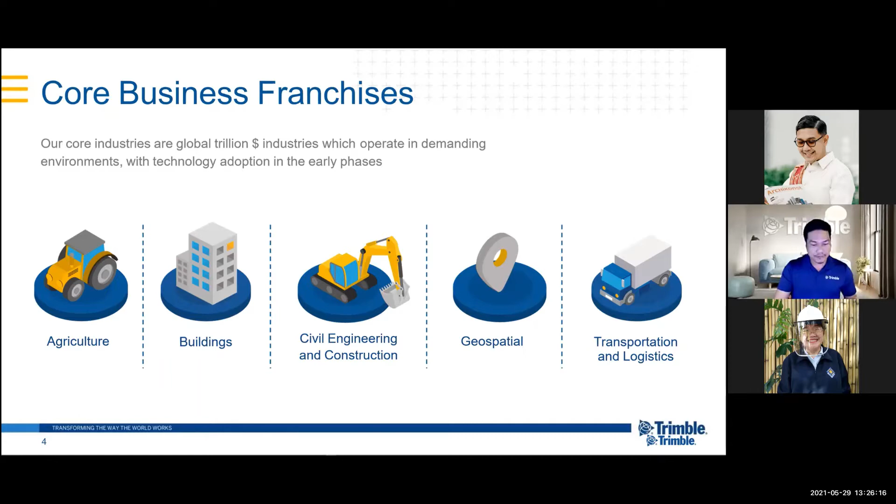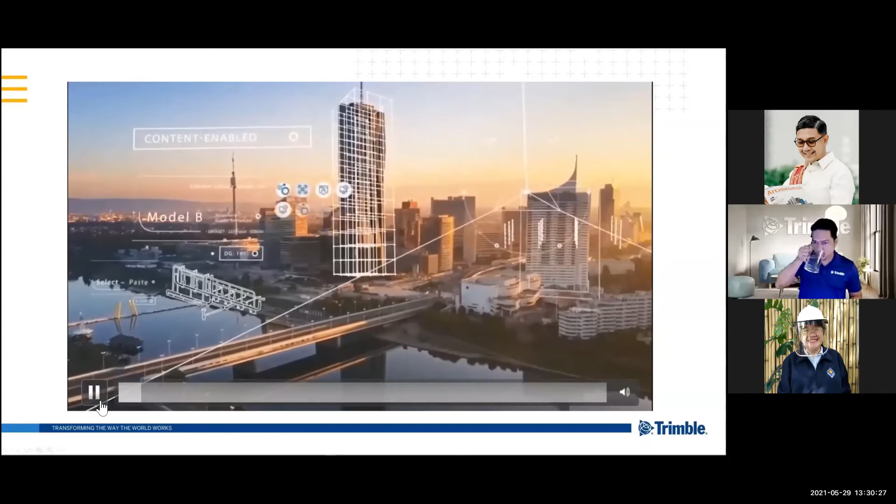Every person and team can work together for shared success. So when you look at your final creation, you can sit back and say, I built that. Whatever you can imagine, Trimble Constructible can build. Trimble.

Connected workflow, to bridge the information islands for better collaboration between project stakeholders. Content-enabled, to enable project teams to eliminate guesswork and misinterpretations. Constructible model with high levels of detail, to provide a means to identify project issues more accurately and make informed decisions.

Apology for the pausing, I think it's because of the internet.

In Singapore, Integrated Digital Delivery (IDD) is identified as one of the 3 key components to transform the construction sector. It aims to streamline work processes through the use of digital data across the entire project lifecycle. The constructible process and IDD complement each other.

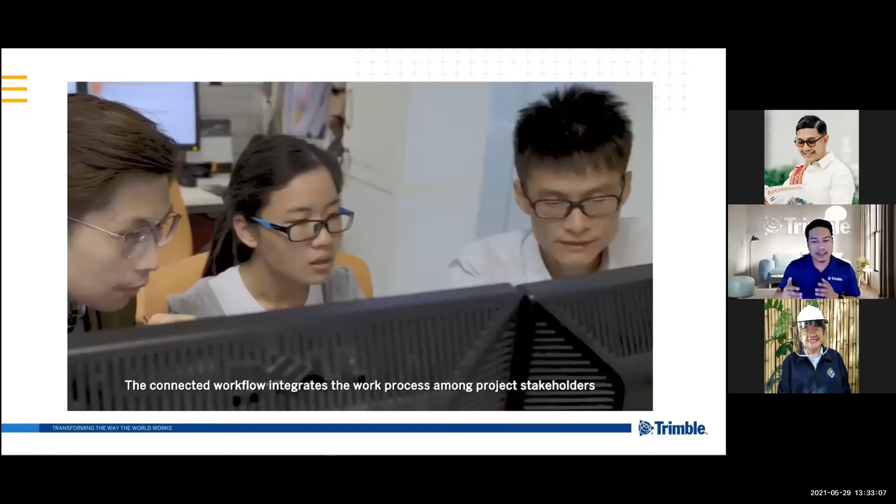If I remember correctly, 2015 it was BIM, and after 2017 it became VDC, with Singapore as one of the BIM practitioners in Southeast Asia. So they developed a lot of workflow to improve these stages.

Utilizing digital content of a constructible model for quality delivery. At the design stage, Tekla enables digital design with integrated physical and analytical models.

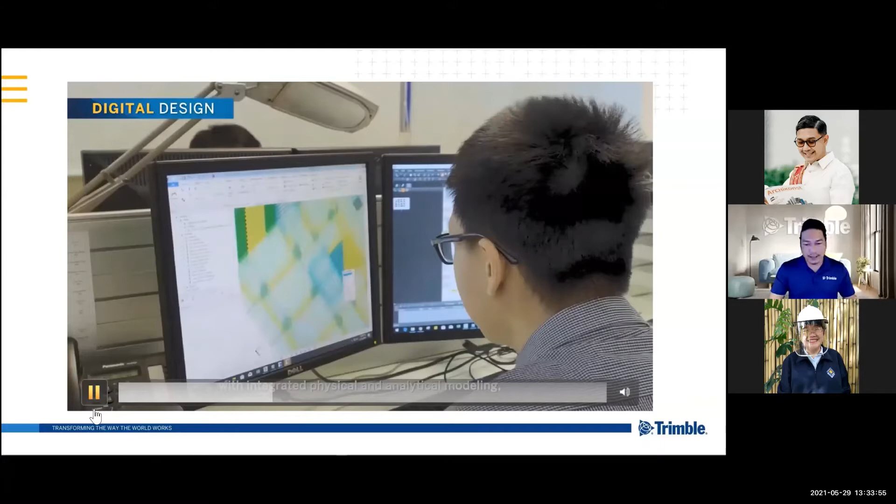I think playing the video would take longer bandwidth to play, so maybe I'll pause it now. If you want to watch it later on, I can give you the link to this 4-minute video.

That video concludes the entire constructible process, all about this. As you could hear in the video, Trimble Constructible is a system of interacting software, hardware, and services. It's not just about software - also hardware, like Trimble navigation, laser scanning, and this, plus some of the cloud services that we offer. These complete the entire process.

As you can see here, it could estimate, improve, and build confidence. You do the estimation, and since you have a better quality model, you have the data accuracy that you can bring with it. So it started with constructible, then it goes to content enabled, and then connected.

So all three disciplines, we call it the 3Cs, complement IDD, the so-called integrated digital delivery.

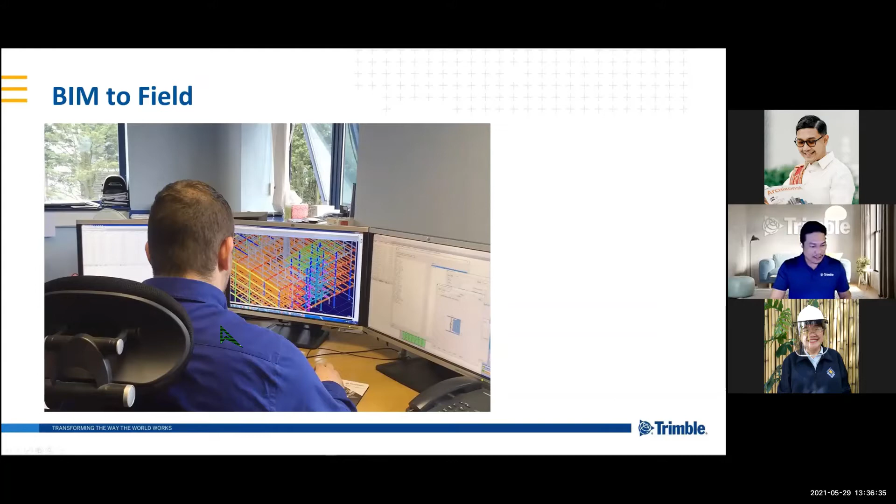If you see here on the screen, this blue person at the office is creating a model, and then they pass it to the site in order to bring much more accurate information. This is one of our Trimble navigation equipment.

Hold on. Are you still able to see my screen? The screen has stopped and the external display is disconnected. Let me stop again and share. Sorry about that. Are you still able to see my slide presentation?

Hold on, notes, how to stop sharing. Sorry, give me a second. I see, okay, this one, right? Is it correct now? Okay, thank you, sorry, my apology. I'm not familiar with Zoom because we use a different platform, GoToMeeting and some Microsoft Teams, but Zoom especially in our corporate, we don't use them.

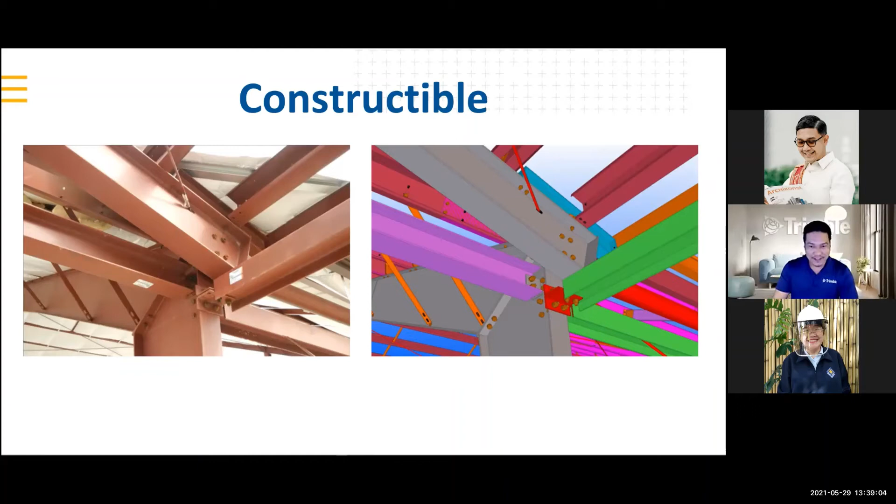If I move forward, this one is another example taken from the Sports Hub project. As you can see on this screen, it was modeled side by side, exactly showing how the shape is and how it was fabricated.

We call it a universal joint fork - this is one of the movable panels in Sports Hub. And then the other one is the entire assembly, but not the entire piece, only a delivery piece for you to be lifted in one shot. They're exactly the same as what was in the model.

Okay, so what is in the model can be fabricated. This was taken somewhere in 2014, and then this is our actual model. I manage a group of very highly skilled modelers at that time, majority of them are Filipinos. So like what Sir Lex mentioned, Filipinos are capable of doing a lot of things, especially when it comes to handling technologies.

So this thing is the site stage, and then I put it side by side with the project, so they are exactly the same. Imagine if you have built your project in BIM and then you found out some issues, you can immediately avoid those kinds of issues before they happen. So you can predict them.

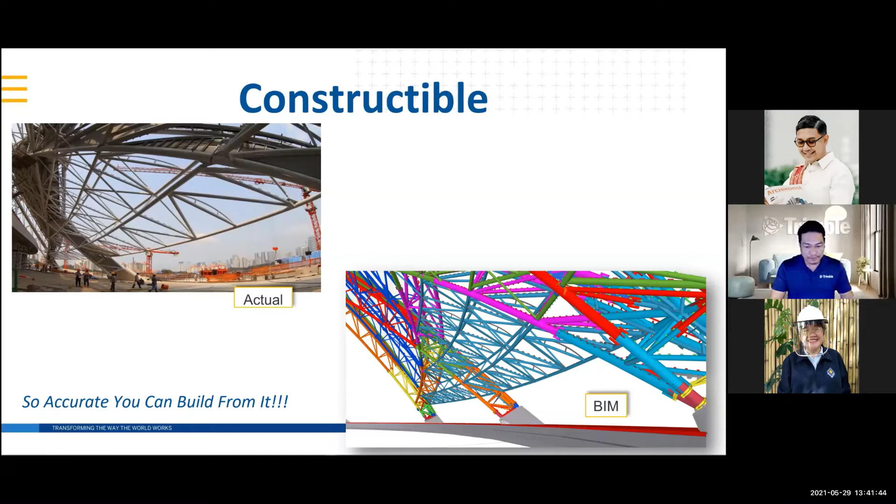So yeah, just to share with you, in short, this is the constructible model on a high level of detail.

Traditionally, on the left side, we are using a CAD provider. I'm not talking about 2D AutoCAD, but there's a lot of 3D software that's not all so-called BIM. I think it was clarified clearly by Sir Lex this morning, there's a lot of 3D software - AutoCAD has 3D functionality, but it's not considered BIM software.

Why does it become BIM? I think he also mentioned the word itself, which is information. So Building, Information, Modeling. If you have the building and the information attributed to that geometry, and then you have the modeling, then these are called BIM. You can go down to the last bolt, put it everywhere there - embeds, mechanical, all the rebar - and then consolidate all of them in one detail. Since all of them are in one entity, you can easily determine what needs to be avoided or considered during the BIM modeling.

So in Trimble - not all BIM software has a very high level of detail. I'm saying this because I'm from Trimble, but Tekla is the only one that could do a very high level of detail, even down to the last bolt, even to such tiny details. So we model that functionality.

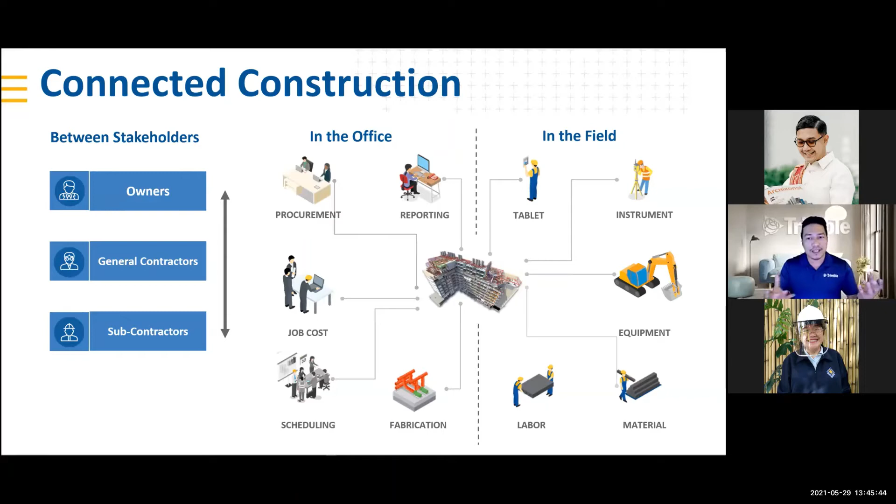So how we do this in Trimble is through Trimble Connect.

In Autodesk, this is similar to BIM 360. So Trimble Connect is where you can put all of your discipline work in different respective stages, and then communicate with the cloud. Later in my presentation, I'm going to show you some quick workflow for Trimble Connect. After we model, we create drawings, we create reports, and then we do this in Trimble Connect later on.

Okay, here's Trimble Connect. So Trimble Connect is an application for construction collaboration, from 1D to 5D project.

Imagine if you have a Google Drive, a file management system that can store data. At the same time, you can also collaborate and exchange information without moving to different software. Meaning, if you are a consultant, you don't need to purchase Tekla Structures in order to view their model. You can communicate with Trimble Connect and use what we call IFC, the Industry Foundation Class format, to view this model.

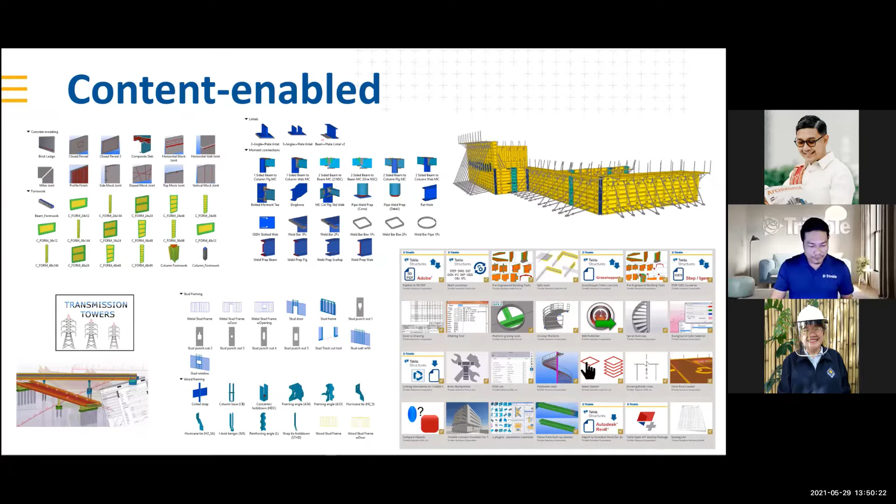Okay, so we also do open API.

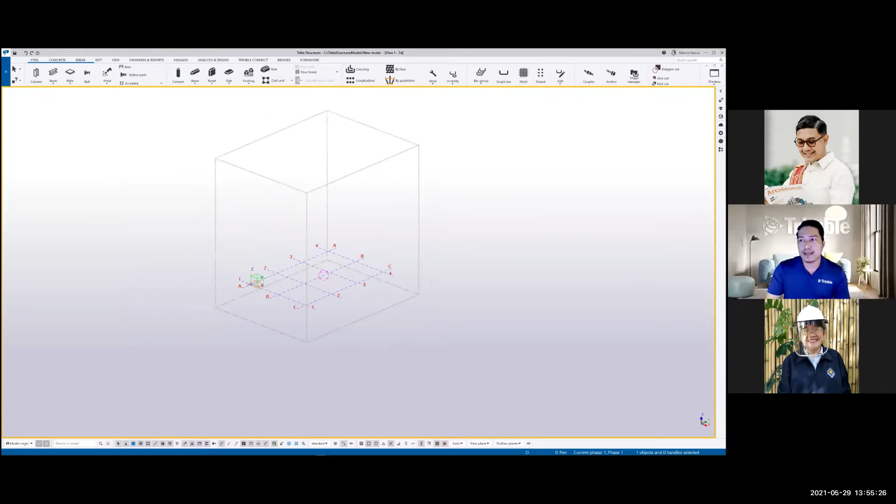Okay, so this is Tekla Structures 2021, which you need to install on your computer. So let's create a scenario wherein Sir Lex is from the engineering consultant. He uses a BIM model for them to create an analysis in order to determine the sizes and the height of the beam and the column.

And I am from the fabricator who will further develop the model into a constructible model. So I'm going to receive a file from him. This file could be an IFC, which is the common format file to communicate with different software. So I copied this link, browse, and I'm going to open it here.

Good thing about what Sir Lex mentioned previously, we have this so-called project base point. Project base point is where you can use your own model origin, but if you want to communicate with other entities, the architect might be using a project base point, meaning the project was located somewhere, maybe in Luneta. Since you are a fabricator you don't worry about that, but since you are communicating with the project, you will pass this model to them for coordination purposes, so both coordinates should be the same.

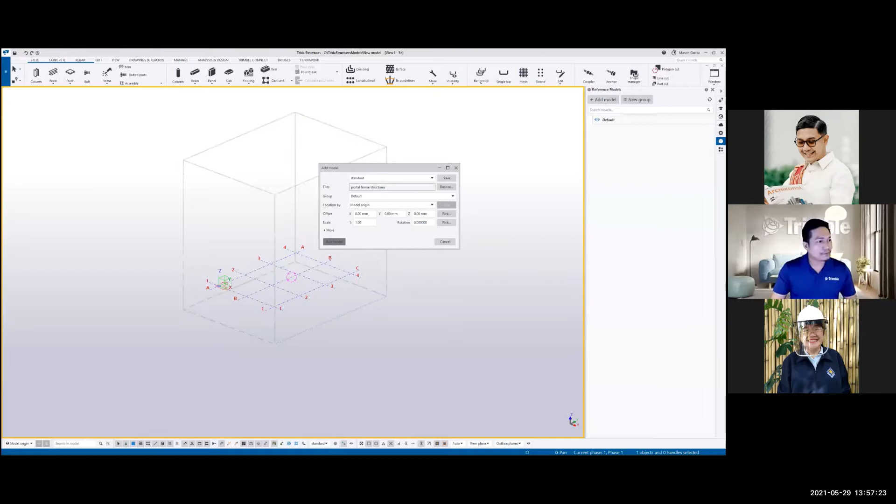Okay, so if you see this, can you see my model, my 3D model? Let me know if not.

Okay, so here, if I click this, this is one entity. By right, I cannot amend this model because this model was from a consultant. So in order for me to utilize this to be my Tekla model, I need to convert this into my Tekla native file. If I inquire this, it's basically an IFC format, which came from a different software. So instead of creating from scratch, you can utilize them and convert into native object.

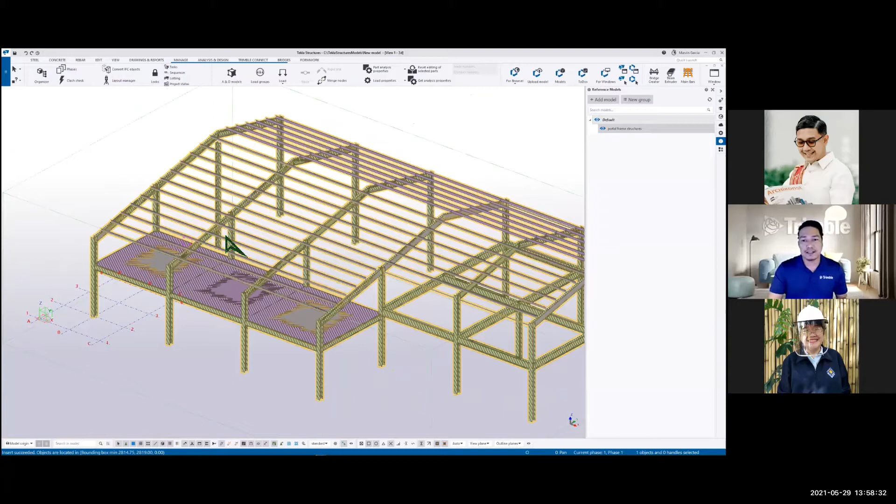Okay, so now it's done. Everything has been converted into my own model. So I'm going to hide this now, hide, right? And then apply.

Okay, so here, they look exactly right. A while ago, they are gray. If I turn on this, it is overlapping with the IFC model and the Tekla model. So there's two models here: one IFC came from a different software, and the Tekla model that's why I converted.

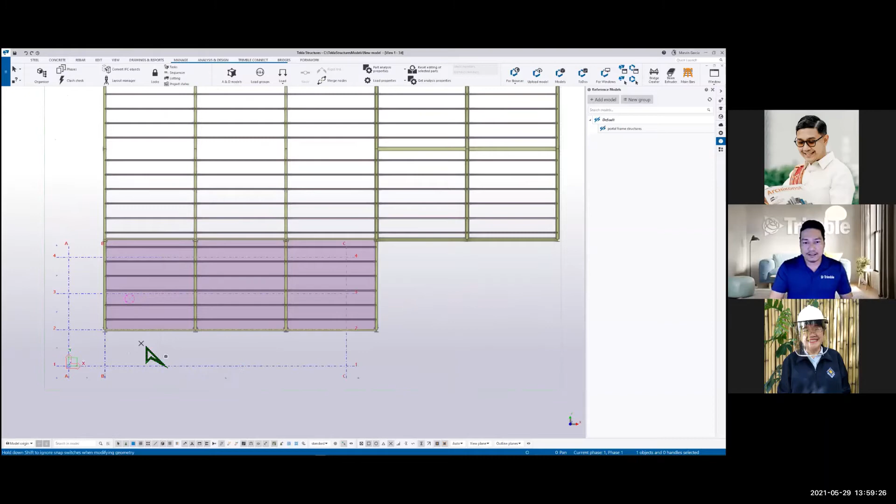Okay, so basically you have this model now. First thing to do is you need to select the grid line to be correct. So you can either drag this grid line in the position where you want to put it, or you can double click this grid line to modify the coordinate value, the x, the y, and the z. This is basic - even if you are using AutoCAD, you need the x and y for you to put all of your items.

So good thing I already saved them, so I don't have to manually input. So this yellow shows the new value that needs to update on this grid. So you see now it is matching with my model. Then I'm going to fit work area. Okay, so this is now the model that I am going to do.

But you can also create groupings. Let's say I want all my columns to be red. And I want all my beams, these supporting beams, but not including this slab, to be different colors. This color coding is normally done by whether they have the same name or same profile. Let's say for this one I'm going to make them maroon purple.

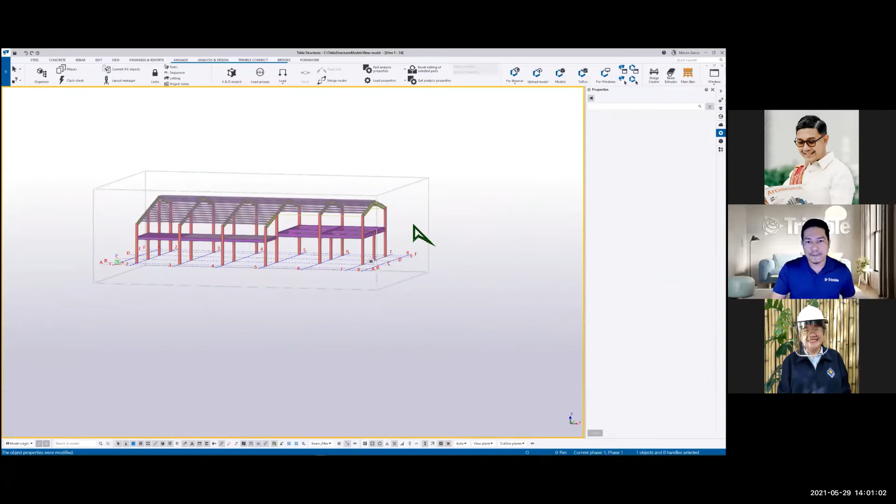Okay, and then all the beams here, I'm also able to select all the beams using filter, and from here, okay, all this beam but not this. Give me a sec. Then I'm going to change it to a dark green.

Okay, and then lastly, all my girts or purlins, let me put it, all my purlins, I'm going to change it to cyan. And then yeah, so these are just... and then I wanted to change all my slab to be gray. Okay, so just to make things tidy.

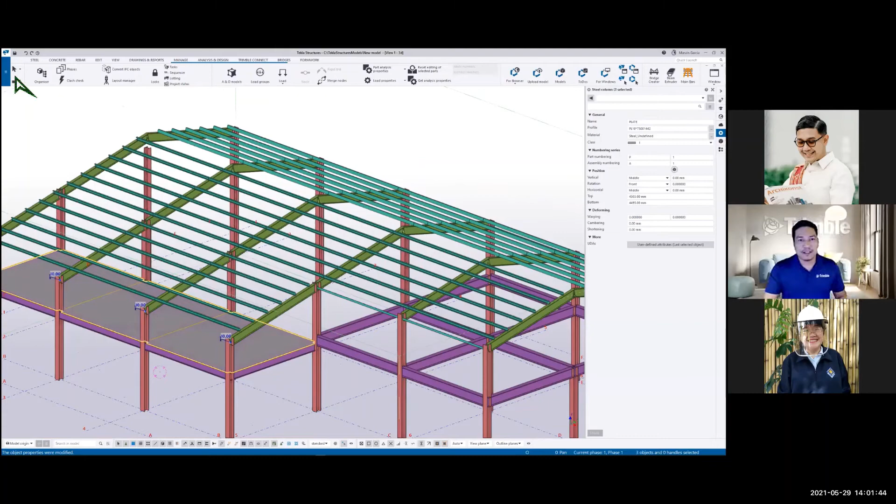Okay, then right, after this what I need to do - so I'm now starting to put all of my footings. So inside these Tekla structures you can do steel, you can also do concrete. So let's say of course we need pad footing in order to... okay, so you can put pad footing.

Okay, so you can either copy them or select them individually. So if you are an AutoCAD user, you don't have to worry because the functionality is almost the same as how it was being done.

Okay, so if you have the Tekla Campus, you may now be able to use them if you want. You can side by side install that and then do a simple demonstration. Okay, I don't have this. Okay, so I have this.

The good thing about the shape here, after I do a basic stick modeling out of this, let's create detailing connections. Let's create the connections out of this. So let's say this footing requires... okay, here, these are the library that we can use. You don't have to create them from scratch. So pad footing, and then you pick.

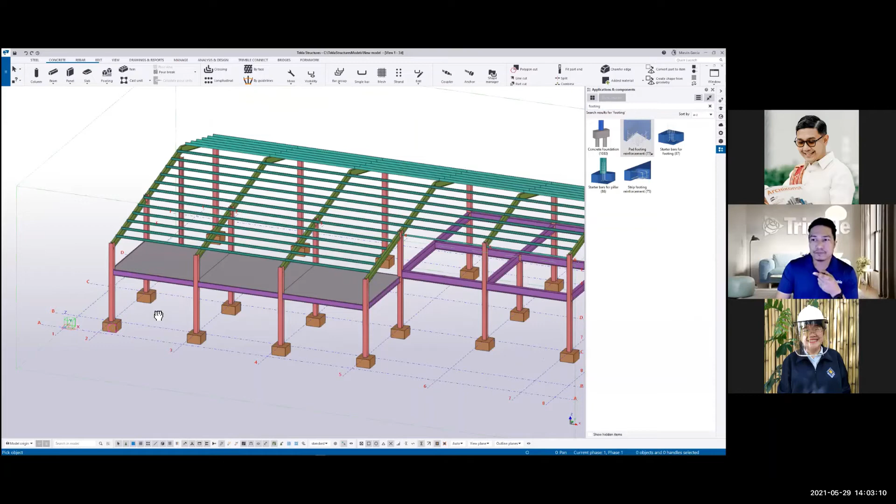So once you pick the concrete, it will automatically create the reinforcement based on that shape and based on the cover thickness. So if I double click them... since Tekla structures are more focused on, this is our strength, here you can specify the cover thickness - the top cover thickness, the bottom, what is the size, and the grade. You can specify the grade. By the way, we use here the BS 8666 or the BS 4449.

This morning I saw Sir Lex mentioning about the international standard.

Since we are in Southeast Asia, our standard here follows the Southeast Asia environment, wherein all the necessary grade, material profile, and codes are listed. If you are working with other countries like Japan, China, US, Australia, or Canada, where they have different codes, you should download that environment separately. So far I have UK and Southeast Asia.

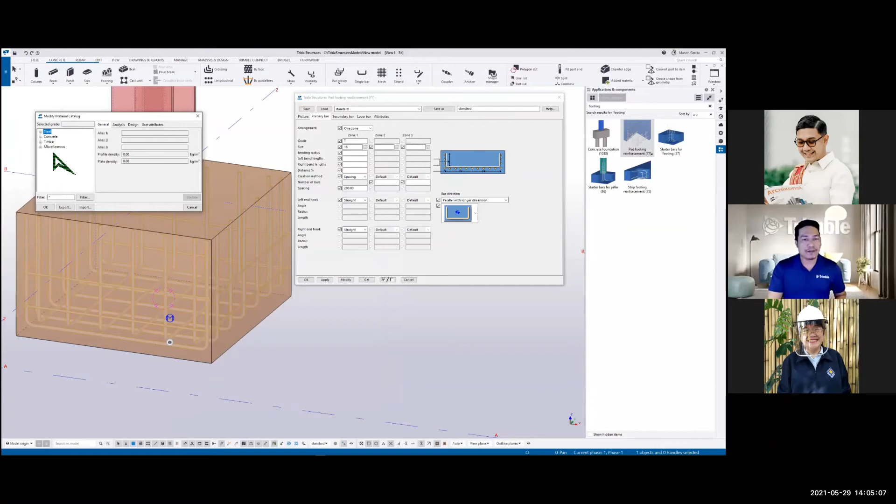So here you can change the angle, the bend, either 135 or 90 degrees. And then the secondary, you can also change the spacing. So everything can be modified here, to 135 or maybe 180 degrees.

Once you modify this item, if you drag it, it behaves intelligently. It follows the logic of the cover thickness, so you don't have to worry about what happens if there are design changes to a different number. The component logically extends following the cover thickness.

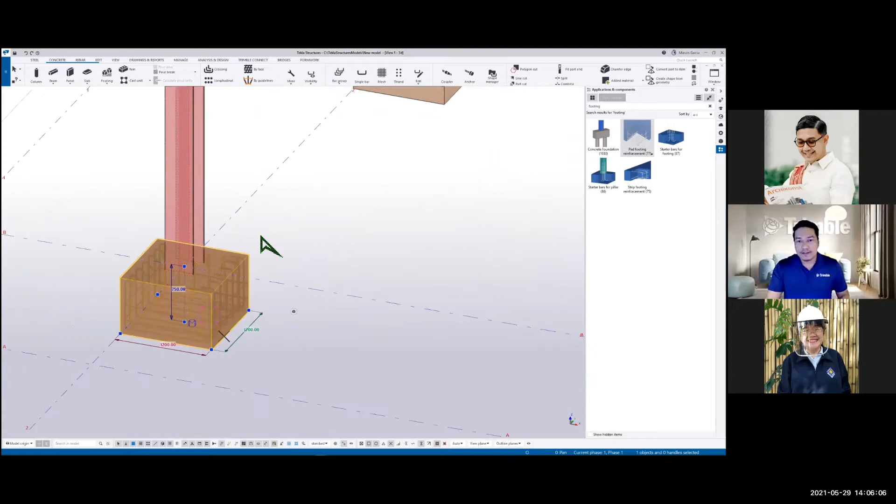So I can select this component. If I want to copy this functionality, I just double click and then apply. Apply means I want to apply all the bending following that same logic.

So let me delete this. I can highlight, and you see it follows. So if I highlight all of this, you see how much easier it is. You just need to highlight everything and it follows the logic.

So I'm done with the footing. You can also add a strip footing if you want, here. Let's say this strip footing, here. Let me pick one.

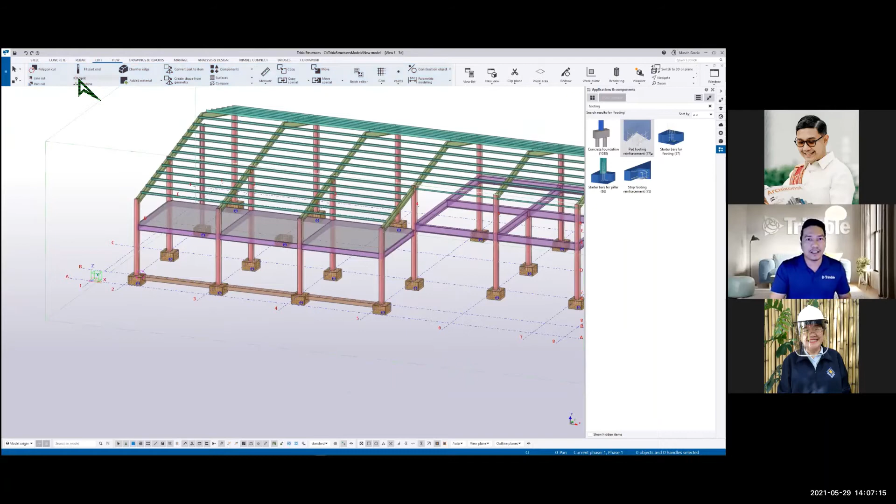Say this one only. And then we have this split functionality as well. Let's split this because it should be stopped from here. Okay, now it's split, click and split this. Or I can copy them so they will be the same as my item. Same thing, strip footing. You just need to click this.

Then you have the reinforcement. If you have a different type of sizes, again you are free to modify them, whatever you want here. You can modify the component.

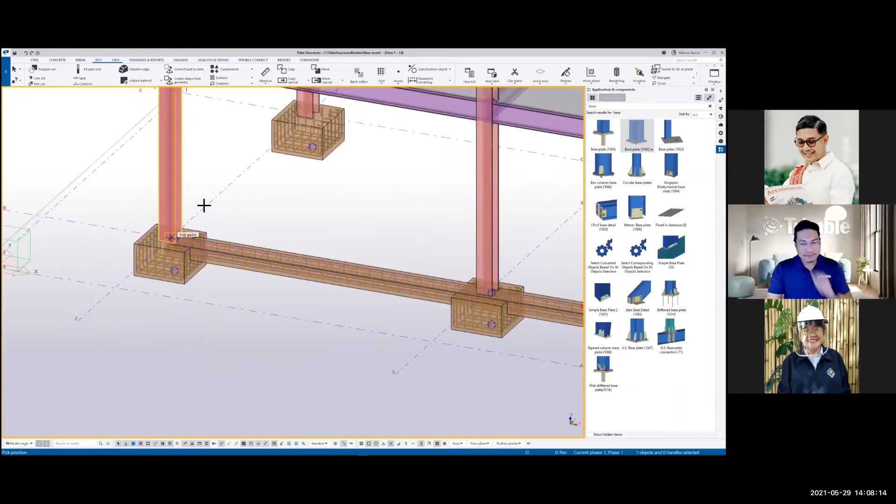So let's go to the base plate. This base plate is just a pure base plate, so I can modify this component to create the anchor.

So everything is here, I can go to anchor, change it to anchor, modify. Now you can see there is an anchor. If you want an actual anchor, you specify this, and you want to put the nut and the washer.

And then if you want to apply this and copy it to the rest of the items, you can do that, either right click, copy to another object. So you only do it once and everything will be copied smoothly, so you don't have to be repetitive creating them. Right, so now we are done with the footing.

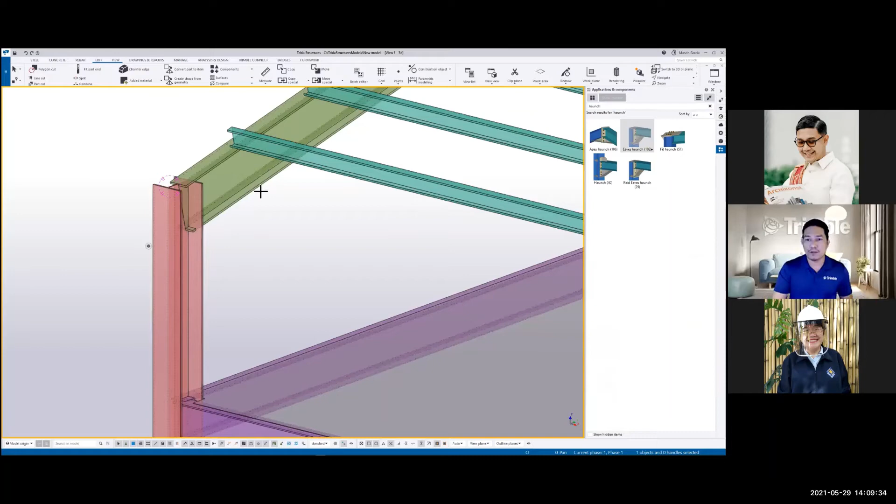So I'm now going to these connections, the column and beam connection. So let's use the haunch, the haunch connections, eaves connection. If I double click, you can see the property that we need these two items. The blue you need, the yellow will be automatically created. So I just need to pick here and pick, and then if I click here, it will automatically create the connections, the end plate, and then the haunch.

When you double click this, of course you can specify whether you want to. The user has the ability to modify all of the information, what is the size of the end plate, the red plate, the cap plate, and even the parameter. Let's say I'm going to change this one to the bolt.

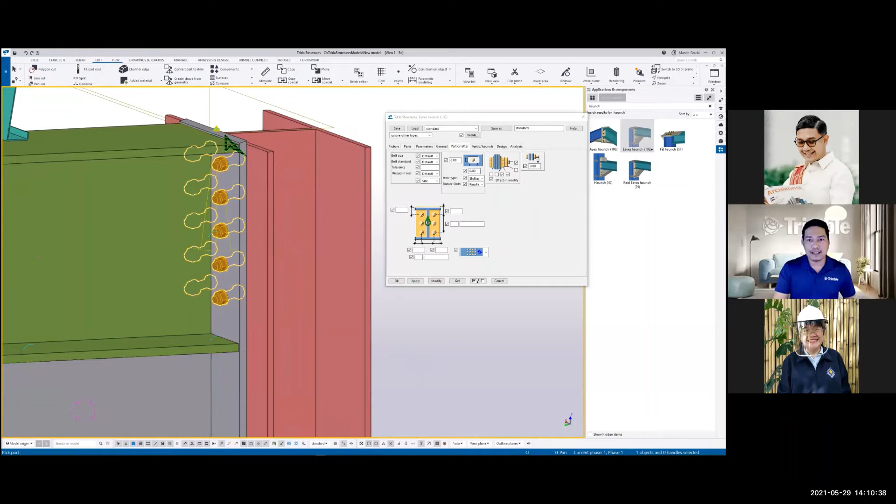You see this one, the bolt rafter. Currently this bolt, if I measure them, this is a 90 pitch. Or if I select them first, I can measure this bolt with respect to the end plate. Currently this is a 100 by 60 roll edge, and then the shear.

The shear edge is 60, the roll edge is 70, right? So let's change it to 120, and instead of 5 bolts, I'm going to change it to 4 because I'm going to use the M24 size. You can use the 8.8, which is the normal 8.8 standard bolt. So if I click this, modify, it will automatically change the property.

Even here, I will not change the 60 anymore. So if I redraw and do the measurement again, click the bolt, now it's become 120. If I want to change the edge distance, the roll edge from 70, I can make it 80 if you want. So if I click this component.

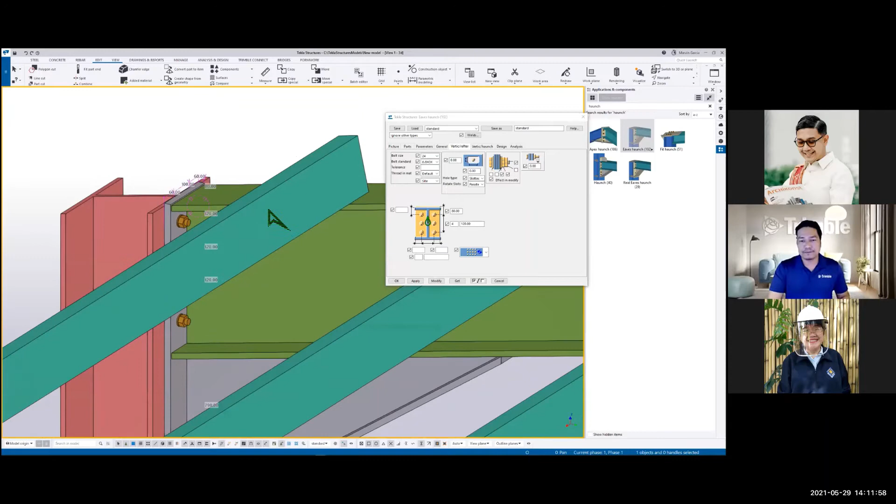So if I redraw, do measurement again, this behaves in a way that what you want is what you see. So yeah, you see 80 mm. Everything has been modeled. So if I'm going to apply this, apply, redraw, I can apply all of this as well to the rest here. Okay, maybe I'll go with that.

So even this type of connection, I can either use this component, the haunch. But since we have a component, we have a column, I can change that connection to extend this. And then change this rotation to a way that it's supposed to be 0. And then instead of the haunch, I can use the same logic. Maybe I don't need to change this parameter to make it straight, right? Also this straight, and then from there I can move them lower.

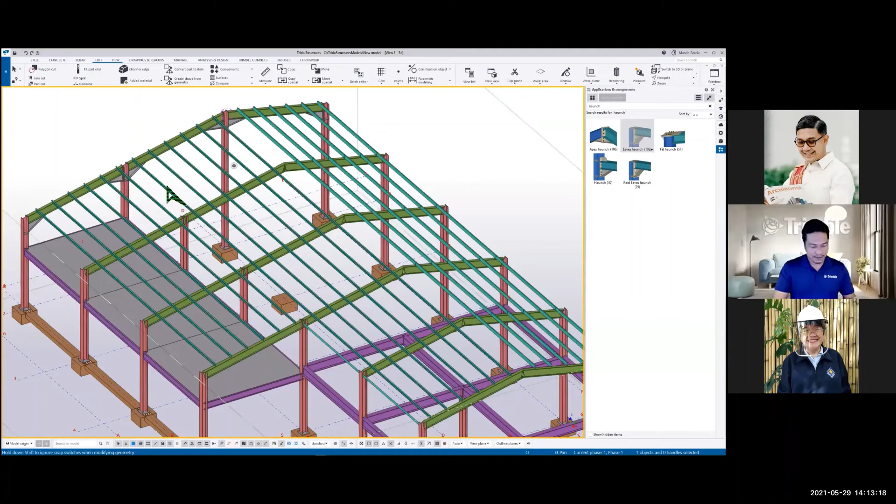So how convenient, you are modifying them inside the 3D. And if you want, you can copy them for the rest. Then we have some of the connections with the beam. Even here we have this beam-to-beam, we have a lot of beam-to-beam connections to begin with. Or we can use this automation.

I can highlight everything, and then we have this component that creates auto connections based on the predefined logic. Let's use the portal frame logic, and use the factory cuts, or meaning fit only. It applies both the connections and framing conditions - beam to beam, beam to column, beam to flange. We let the auto connections behave. Apply.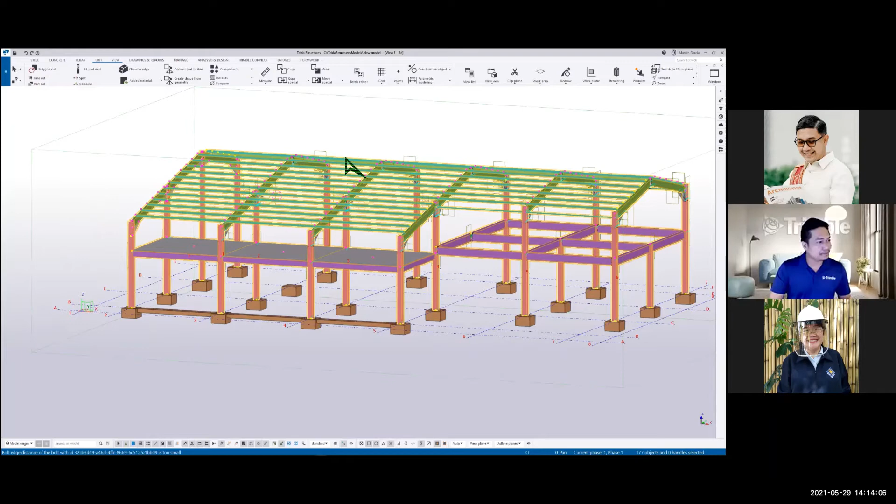Okay, hold on. See this, right? Now, you see, it is now built in one go. I don't have to worry about all of the connections, even the beam connections. It's now created. So it's good, especially when you're calculating only the MTO, the material takeoff, or maybe the QTO, quantity takeoff.

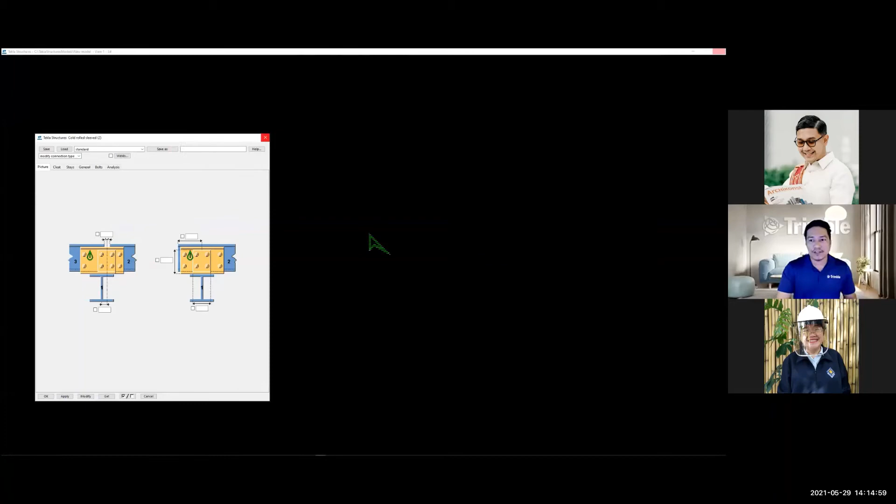See the image - if I connect this beam to this one, then middle mouse, it should be able to create... what's the size of this? Give me a second. So, okay, let's say this. Oh hold on, give me a moment. So this one's supposed to be, is it 220? 250, sorry - here, you see the 250.

Then if I apply this, give me a second. Okay, here - if I apply this, and then continue doing that work, I just need to, you are creating a component in only one go, and then you specify that. And then for the other side, if you want, you can select the two and it will create connections. So it's quite intelligent how we do the things.

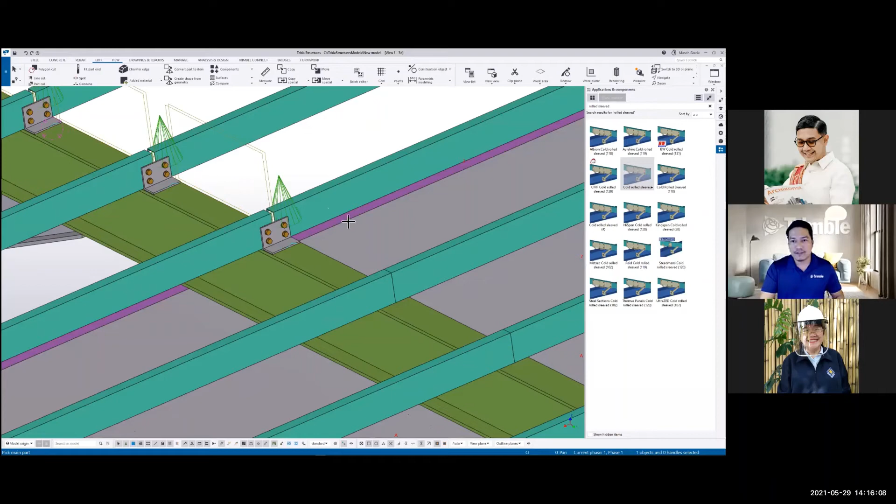Okay, let me find a way. I can completely do all of this, sorry, let me avoid some of that. Okay, I can do all of this, but I think for the sake of the session, it would take a while, so maybe let me do it differently.

So you just need to copy or pick, maybe these connections are different from the others. So, right, then we draw. Let's say only this. So now I won't complete all the connections, but if I have plenty of time, I can complete this.

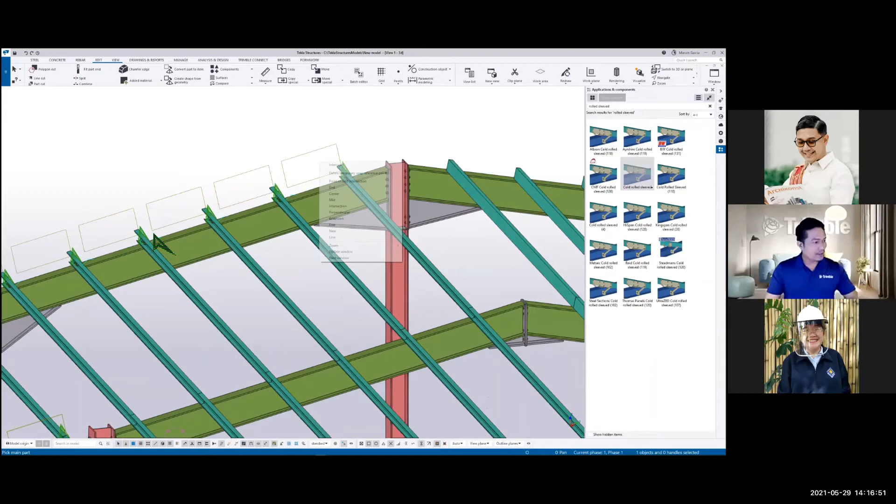So let's say now we have this model that has these 30 connections. Okay, now let's create this view.

Compared to AutoCAD, you create a view, plan view, elevations, north side, and then later you stitch into 3D. In Tekla, it's different. We started in 3D, and from that you're now able to generate different views, plan and elevations.

So we have only one view currently. Then I can create a view automatically. Give me a sec. Okay, you see this?

Now, let's say if I want to view grid line 2, here I can view it. If I click this, I have grid line 2. If I want to view grid line C...

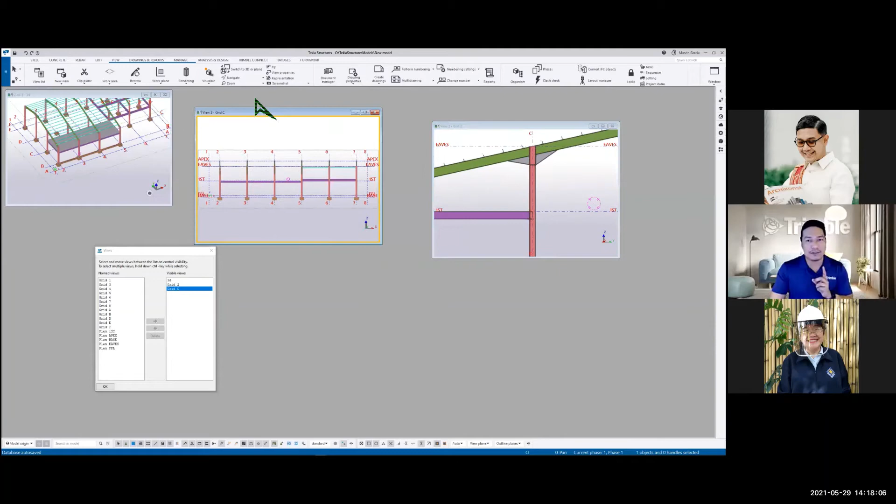Tekla Structures is more on the physical modeling, not analytical model. Although we have analysis and design, if someone has a question, I can answer them right away. If it is analysis and design, we can only bring in self-loadings. But to calculate the forces and sizes, this is not the software for that.

It must be the Tekla Structural Designer. So it's different software, but they are family under Trimble. Okay, so we have this.

We have this import to Tekla Structural Designer, wherein you are able to import the analytical member from Tekla to Designer, and then you can calculate the forces and change the sizes as well. But these are fixed considering that you already designed the member, and you're just furthering the detailing aspect. So we don't have the analysis here so far.

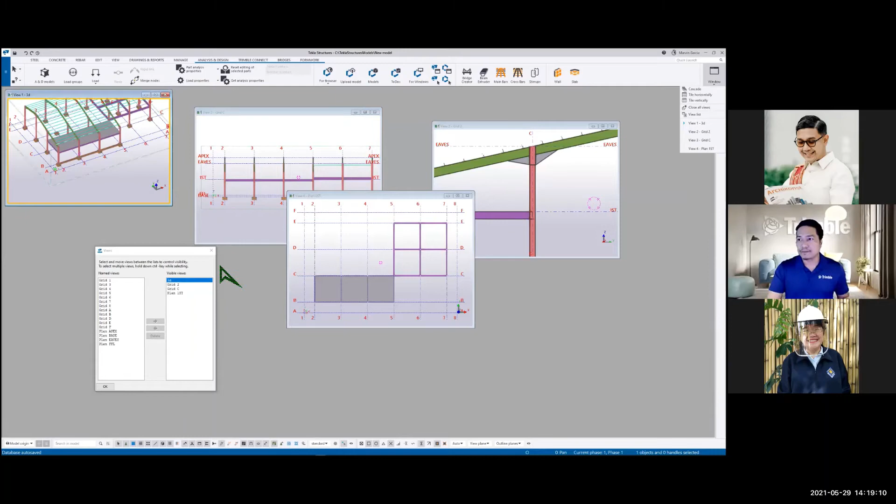Okay, so this one, I have this several views. So we never created these elevations, this grid line C, but they are automatically created once we finish the model. So using this logic, we can create drawings straight away, like the marking plan or general arrangement, for easy access.

So we are now done with the modeling aspect. We'll now move to basic drawing and creation. Okay, so let's start with this. So I'll close this now.

So let's say I choose this view, right? I right click this, right click, create general arrangement. So I can choose which views need to be incorporated in one drawing.

So to those who don't know about the general arrangement, this is like a marking plan. I forgot what we call it in the Philippines — I think it's marking plan or erection plan. When we moved to Singapore, I think Sir Lex would understand this. It could be called a marking plan or general arrangement plan. We have different names, but the concept is the same.

It's to view where the assembly is, either to erect them at site or to determine exactly where they are located at the site. So that's the logic. Let me select 3D grid line 2, grid line C, and the first floor, and then I'm going to open them instantly.

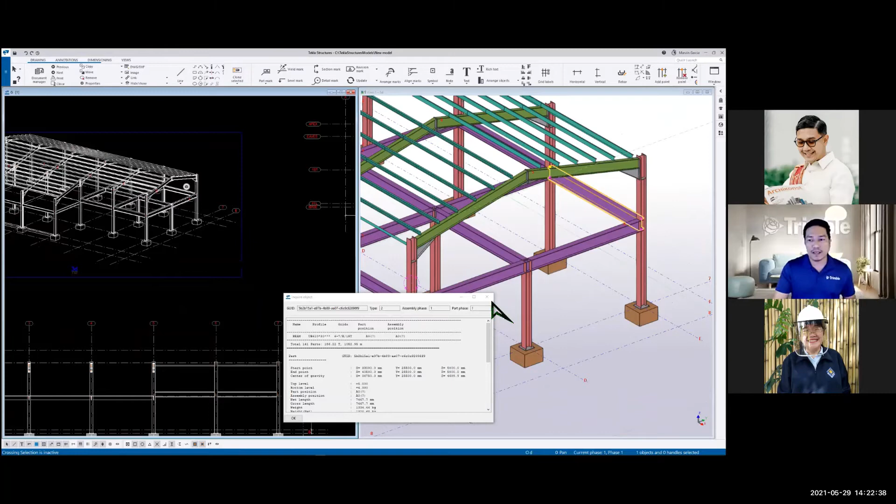They are BIM models, so they are linked. Let me expand them. So on this exercise, in this demo, I'm going to show how quickly we can generate the sections and the elevations, not to be fully presentable, but to demonstrate the process. So let's say I'm going to start with this view.

Of course, we have this info - they are the same, we're only doing some quick representation. So here, I'm going to create a detail view of this. The detail view is similar to AutoCAD - imagine if you do it in AutoCAD, you have to draw them separately, and either they are not to scale or maybe not true scale, right?

Okay, there's a welding. Why? Because there's a welding in the model. But for the sake of our sections, let me remove the welding for the meantime. Give me a second. Okay, weld mark - they are shown, so I'm going to set it to none, then modify, apply. So for the meantime, let's hide them.

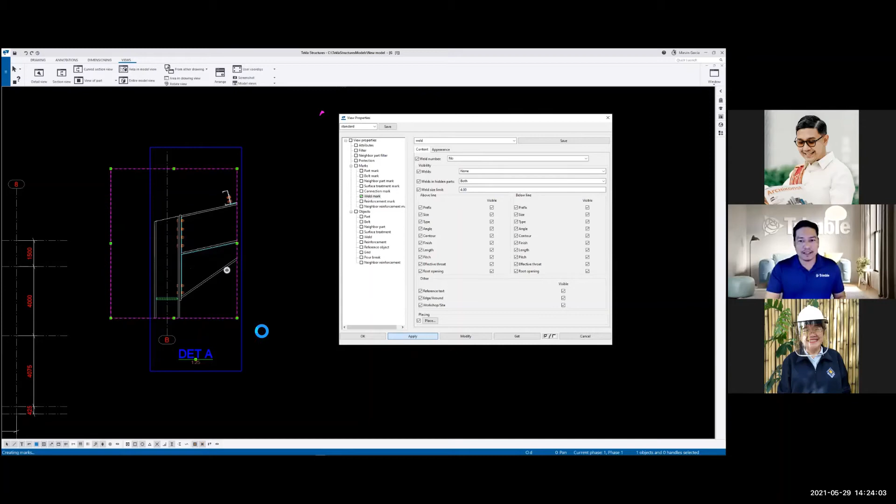So basically, the size of this blow up is larger than what it came from, 25. You see, when I click this, it highlights, right? If I drag this cone, you see the bottom also moves. If I drag this, it also moves this way. So they are linked - so if you create a blow up section in this area, you will guarantee that they are exactly the same, because they are one model.

Okay, so this is detail A. And let's say if you wanted to change the appearance to make it rectangular, hidden, and then make it blue - right? And then I'm going to hit apply, so that the next time I do this, it will automatically create the blow up.

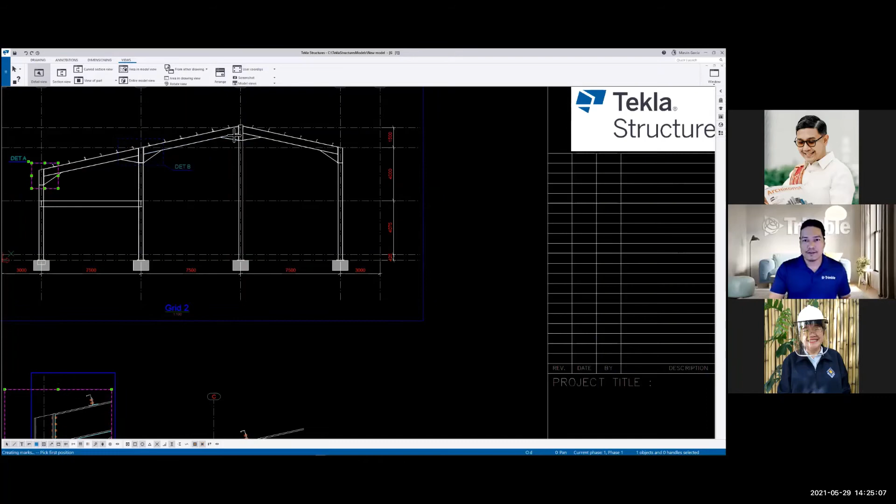Okay, so just line them side by side, and then this thing - if the scale is too big for you, you can modify them. Let me move it. If they are too big, then yeah, let me move this one a little bit. Okay, move this one a bit, move up. So there's detail B.

So you don't have to worry about the editing because they are linked. If I change it to a different name, it will also automatically update. Here, if I change it to detail 1, for example, it will also change to 1. So the logic there is you don't have to worry about where the sections came from, because they are exactly the same.

So if you want to create these section or detail views, but if you want to create an annotation that is symbol only, we have this mark - so they are detail marks. You can also create a mark of your own that is the same, right? Here, this is not linked to anything because this is only an annotation. You can make it F, typical to E, or maybe just use the other hand, okay?

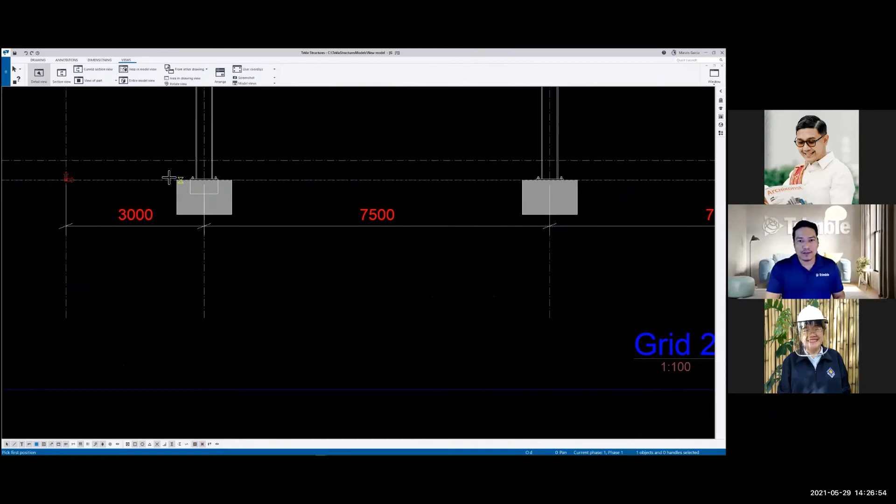And let me continue some of this detail, this one as well. Yeah, so I have these sections here.

If you want to change the concrete - remember we modeled them as concrete, basically they are also concrete in essence. Here, concrete. Hold on.

I'll make it black and then change it to automatic. Yeah, oh, it's custom. You see, it becomes concrete because they are concrete, right?

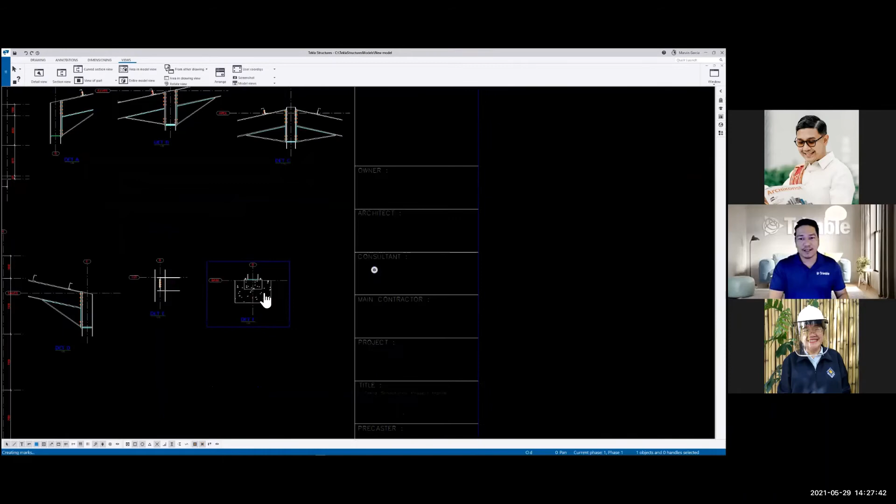So I believe this is a strip footing, and then the other one is a footing. Strip footing is the small one, so you have multiples. So here, you can create all of this.

And from here on, you can also create sections of this - let's say create sections. So you can section a section. So technically, you can create a section out of a section, right here, and whatever the value is, it's exactly the same. What else? I can also do this view lastly here.

So all the basic logic, and they're all linked, right? And maybe this section from your anchor bolt plan. So you have all the logic, all the necessary. If you want to know how to print, this is the printable version. This is what it looks like when you print them with layers. If you have monochrome, then this is what it looks like, so you can view them.

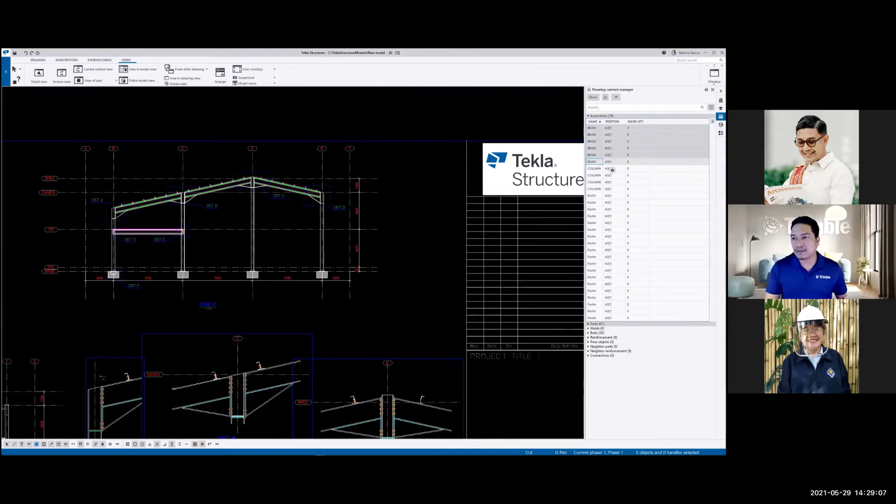So let's now go to markings. If you want this marking, let's say you just highlight everything, and then from here you specify the annotation for what are the profiles. Instead of manually picking them, you can say I want to get the profile for all my beams, and then add mark. You want this column to be the same, add mark, or you want all the purlins, add mark.

But it will show everything, right? But you can create separately. Let's say you create this one, add mark, and then from there you can annotate. Let's say modify - here you can type text. Let's put it as typical, since they are all typical. You can also put annotations, right?

Okay, how about the arrow key also? If I double click all of this... double click, and then if I want to change my arrow here, you can specify the arrow, right? You can hit apply, and when you highlight the rest, it will also update the settings of all the cuts.

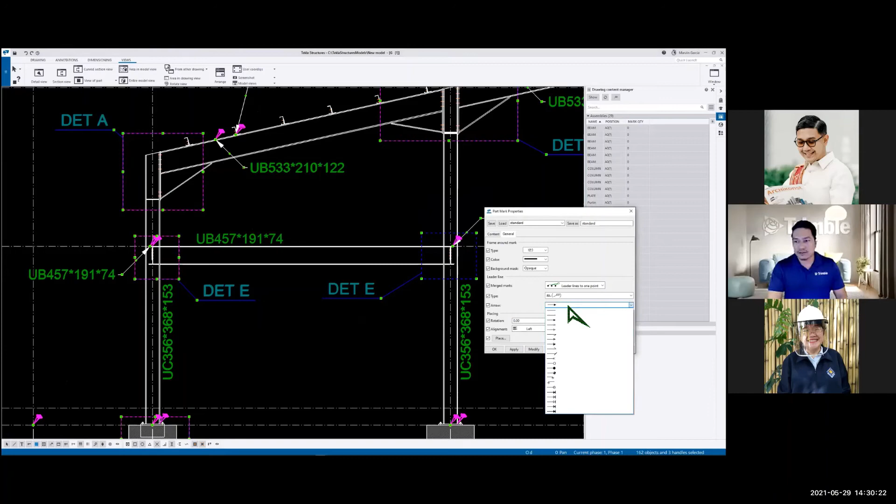So it's up to you what type of arrow key you want. The detailing part we leave to the company standard. So if I want to window everything and show, I will not include the 3D. Sorry, let me highlight this, but not the 3D. Okay, show. Hold on.

Let's say I'm going to select only the beams, columns, and footings. Highlight - then you can guarantee that everything is the same, correct, or accurate. So for those plates, you can highlight, show them the plates, and then you can specify the plates separately.

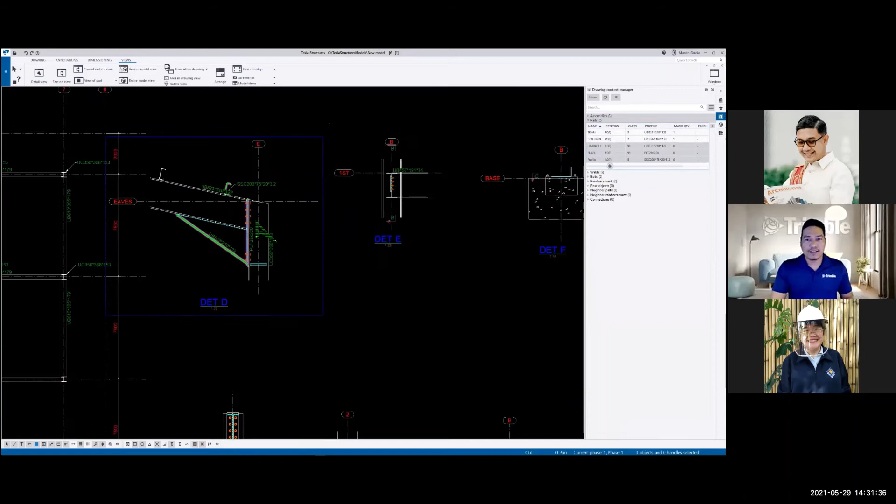Let's say all the plates, because we have the haunch and plate purlins. So this is just like a quick one - the information is there, we just need to extract them. So that's how the BIM modeling tools is all about.

So you model them in a way that they're as accurate as possible, and when you bring the information, they are actually what it is - they are not text. If you change this model to a different size, it will automatically update also inside this model, because they are modeled. So of course you can add a lot of dimensions if you want.

Dimensions here - these are the basic, right? Quick one. So you will be avoiding the manual dimension. If there's a different dimension, let's say this, let's see, this one's supposed to be...

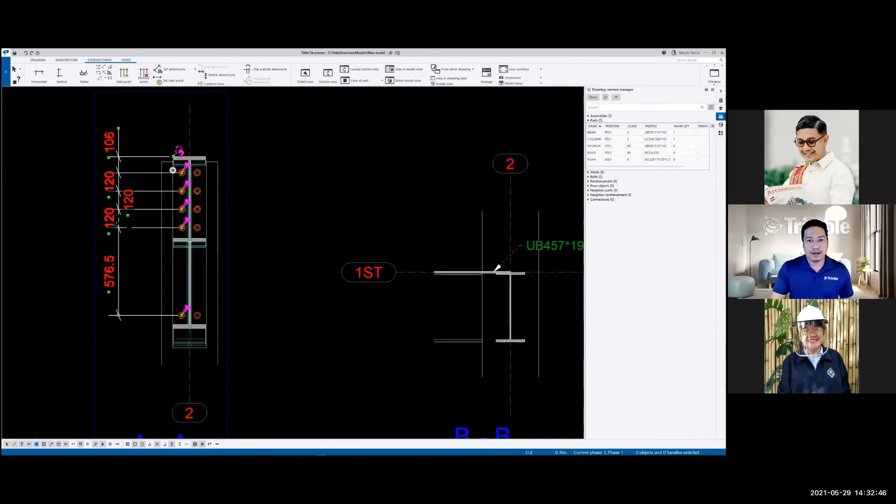Okay, sorry, why is there a 0.5, something wrong? So this must be a whole number, right? So let me update that. Basically here, because Tekla is accurate, the precision is 0.5. If you make it 0, then you can make it a full number, round it off.

Right, so welding - everything, you can add welding if you want, especially if you add, sorry, this is one level mark. The good thing about the level mark is you can determine the height. Let's say, wait, let me click this - you see the height itself.

These are accurate based on the model, so you don't have to worry about the level. Add level, say this one, grid - so you see the first floor is 4.500 meters. So they're all accurate. Okay, so that's how the model is all about.

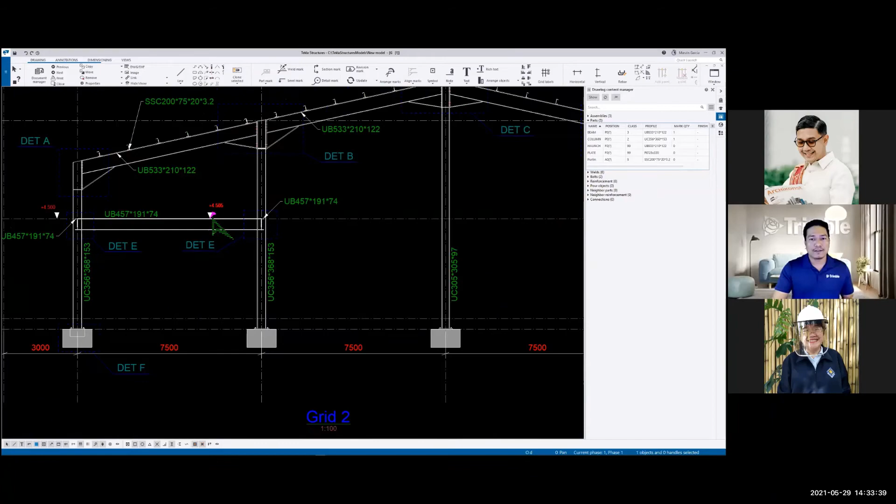All right, so let me now go to exporting them. Let's say I'm going to export them into AutoCAD, for your submissions - of course some submissions still do the 2D submissions. So you can submit them into AutoCAD, whatever version it is. Export - you can preview them if you want to see what it looks like. Hold on, I should not preview.

Okay, you see the... yes. Actually here you can generate footing in the drawing also automatically, because whatever you model, you can generate the drawing. Because here you can have the rebar and everything. Yes, if that's the question, yes. So export - I never include the reinforcement, but yes, it can show the reinforcement.

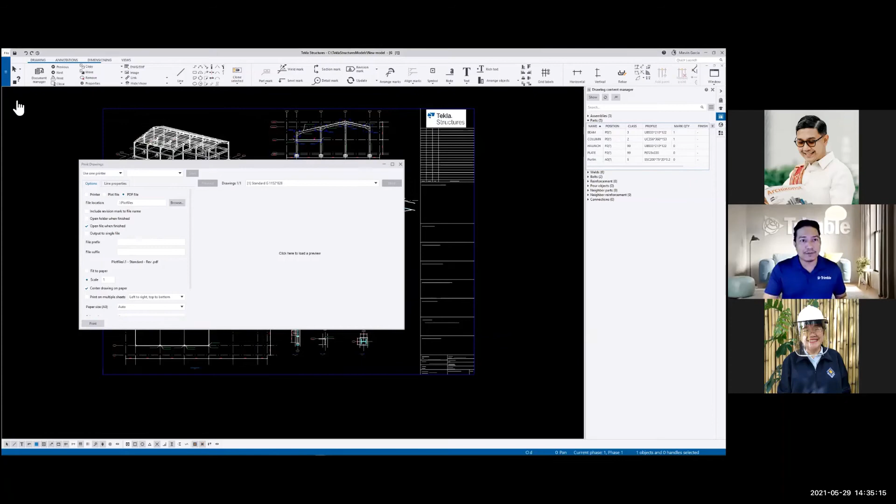So that is the AutoCAD, and maybe I'll put it later on. I'll go now to export them to PDF. Same thing, if I want PDF, I will not view them print. Let's see, so if I go to my model while I'm waiting for the PDF, yeah, see this PDF?

Now it is the PDF, so the one that we created. Okay, so the line weights. I didn't use line weights because this is with shaded. Of course, you may have a better presentation if you do it nicely. Yeah, but that's what it is.

AutoCAD, now if I go to AutoCAD, this one, you can still modify them in AutoCAD, but we don't encourage you to modify them because the AutoCAD is only for your submission purposes. But anything that can be done, edit, put text, line, must be done in the BIM model, because once there's a new change inside the model, it will automatically update.

You don't have to worry about where did you submit the versions, maybe it's revision B or revision A. So although they are similar to AutoCAD, a lot of AutoCAD will not be removed actually, because we are still utilizing AutoCAD as the main, like how to import, how to export. But yeah, hold on, AutoCAD is still opening.

Yeah, okay, so this is the AutoCAD. Okay. So this is what it looked like in AutoCAD. If I zoom, extend.

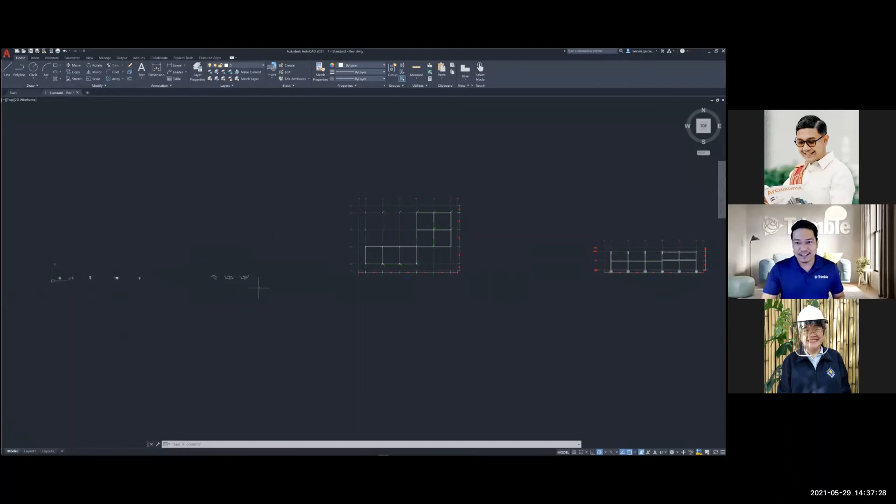Okay, here. So if you notice there, because it is inside the model, it came as a different entity, right? But you don't have to worry. If I go to layout, it's still in the paper space. Yeah, here.

So you can move the paper space and all of this if you want. Okay, here, like for example here, if I double click, like how the AutoCAD works. Okay, then I can move, right? And because these are inside the model.

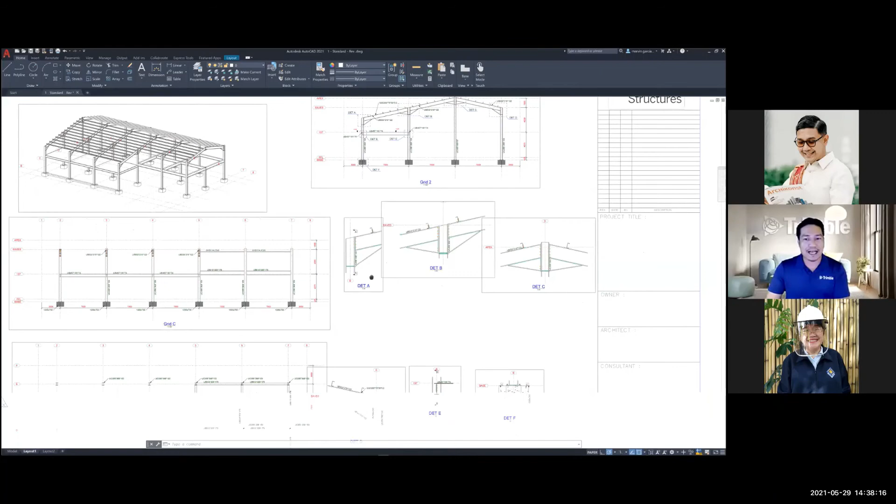Escape. This one here. So you can drag or you can move, but I will not do that because anything we don't encourage, we discourage you to modify them in AutoCAD, because anything can be added, lines, circle, anything you can add them inside Tekla Structures. Okay, so this is the AutoCAD output.

Let me close them. Okay, so now we are done with the general arrangement, or erection, or marking plan. I am going to show you the assembly, what it looked like. So let me close this.

Okay, remember we have created the connections a while ago, and then we will utilize those connections. So let's say this beam, okay, here, I'm going to click this member, click 3D, this is this connection. So this member has everything. So if I create a drawing, it must include also all of these attachments.

So if I'm going to create a drawing out of it, maybe here, right click, create assembly drawing. Okay, let's remember perform. Okay, so one drawing created. Let's open the drawing.

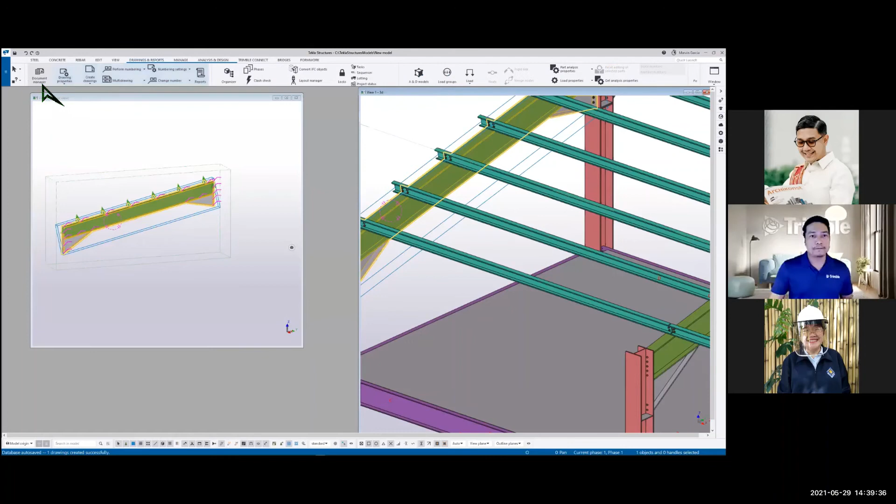Okay, so you see this one, A. G stands for general arrangement. A stands for assembly drawing. So if I'm going to open them, using the default drawing template.

Hold on. Okay, you see this? You see what it looked like? There's a basic front and top view and some sections. Although you can alter and modify all of this depending on what type of detailing standard you may need. But this is out of the box sections.

You can change this one, but the good thing about this is the bill of material. You don't have to manually edit them in order to calculate the size of the beam, the material, the profile, what is connected to that assembly. It will automatically generate for you all of this material list. Okay, so the area, the weight, they are accurate.

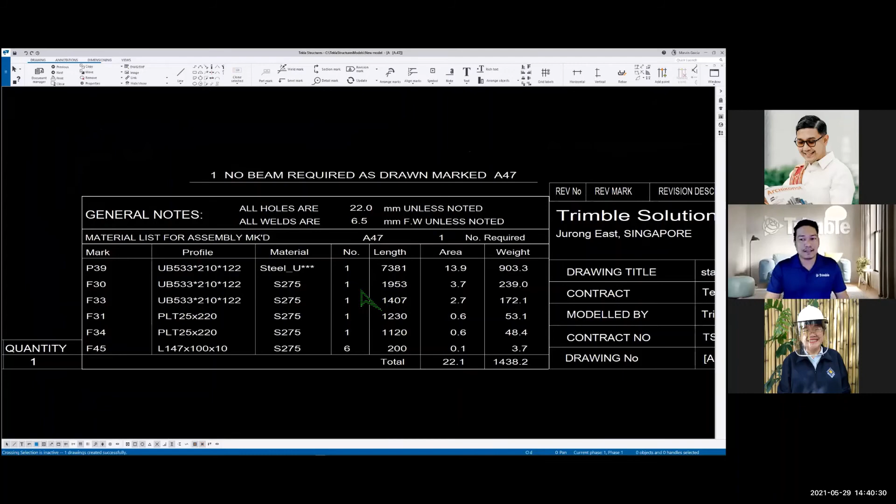So whether you have some notes that is unless noted, how many beams, the drawing mark A47 is the mark, where it is, what is the quantity, what is the phase. So these are the basic information that you can have. So this is assembly, right? So if I close this,

and then let's say, let me create the column. Okay, this column, let's say I modify this connection. Sorry, I modify this connection. I'm going to put, sorry, maybe this one. I'm going to create a drawing, assembly drawing for this column, together with all the stiffener and everything, plus the base plate, right?

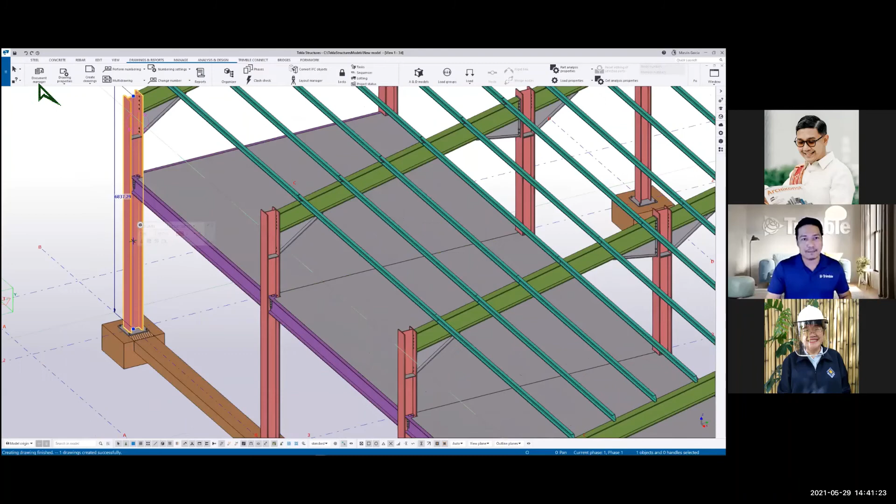Base plate. So if I click this, I should see another beam, another column assembly. If I double click, okay. So I have, I don't know, not this.

Hold on, it must be this. Okay, you see this column with the attachment, where it's the location, the detail? This is out of the box. So you can still perform a lot of ways here. You see the material here. So this is all attached to that object, to that column.

So you don't have to worry about modeling them as accurate as you can. Actually, not just you can—you must, in order to generate a correct or consistent output. So you must model them.

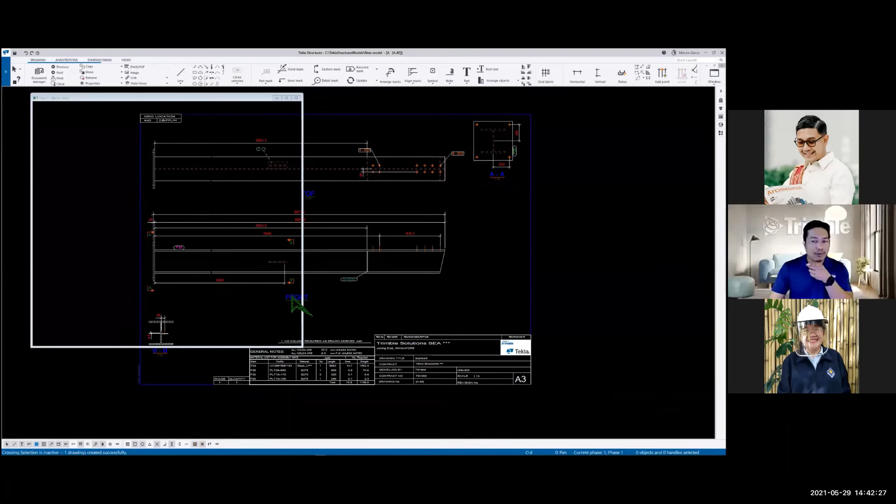Okay, so we can select everything. Let's say this one is without just stiffener. Let's say I'm going to modify this and add a closure plate. Here I'm going to add a parameter so I can add the closure plate. Before it was not modified, now it added this stiffener, right?

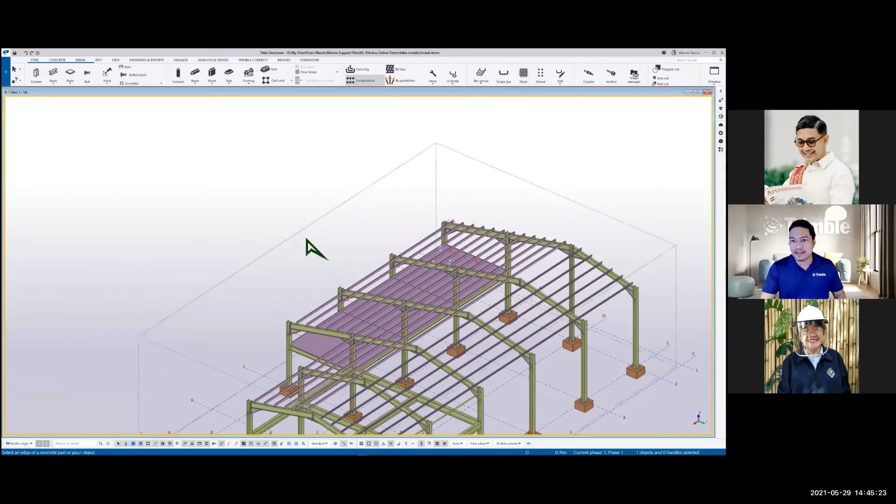Okay, anyway, my other model doesn't appear on my screen, so good thing I have this backup. Let me share this screen. Although this is a different model from the way I did it, it's exactly the same. The only thing is I don't have the drawing, but let's say I already added it. Can you see my screen? This model, the one with the green, not the colored one. Can you see?

Okay, so let's say if I wanted to create a single part, let's say this plate. Oh, I cannot select also. Okay, here, if I'm modifying this plate, if I select this...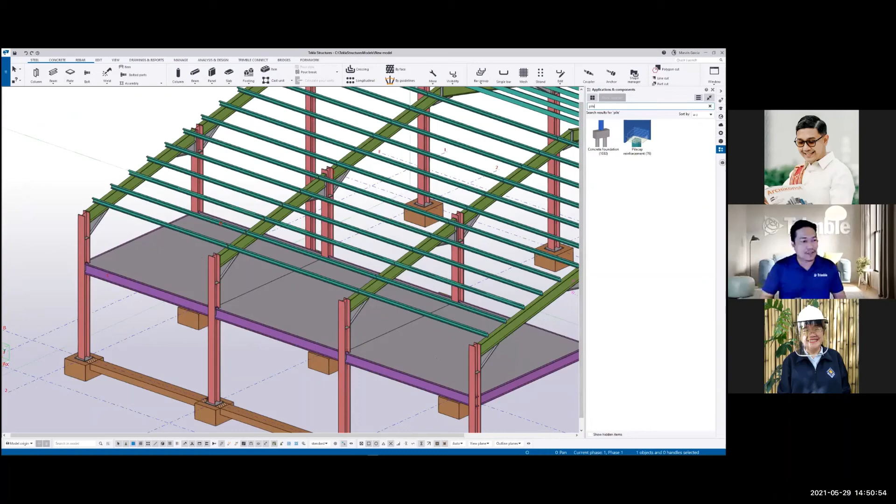So let me go for the single part here. If I click this object and then create single part, you have an assembly drawing. Then if I go here—SW.

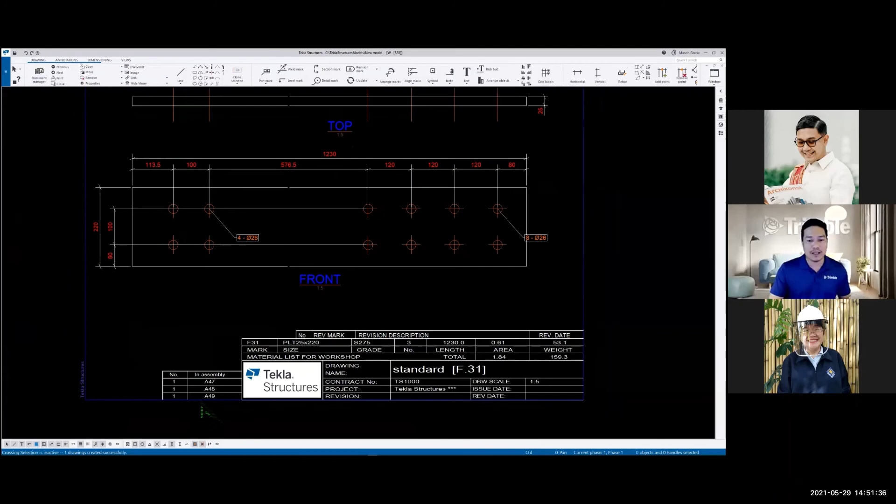So this is the so-called production cuts, wherein all the necessary information on how it was being fabricated, the grade, the quantity, the length, the area and surface area—or maybe you wanted to blast them or paint with galvanized, so you can get the area and the weight, and where it is assembled, which assembly mark it's connected to.

Okay, so that's the thing, so let me move forward. Okay, we are running a bit. Right? Okay, so after that, here you can...

The next thing to do is create a report, right? We have this bunch of reports that you can generate. Let's say material list—you can specify all of this, let's say all the material, and then from there you can get the information: the weight, how many, the length, and the weight. So these are out of the box. We have plenty of these reports that you can choose from.

Even the bolt, the pile, the rebar list. Let's say if you want to calculate the rebar list, you see the rebar also together—how many, what is the bending, the bar bending schedule, the BBS, the bend—so you can specify.

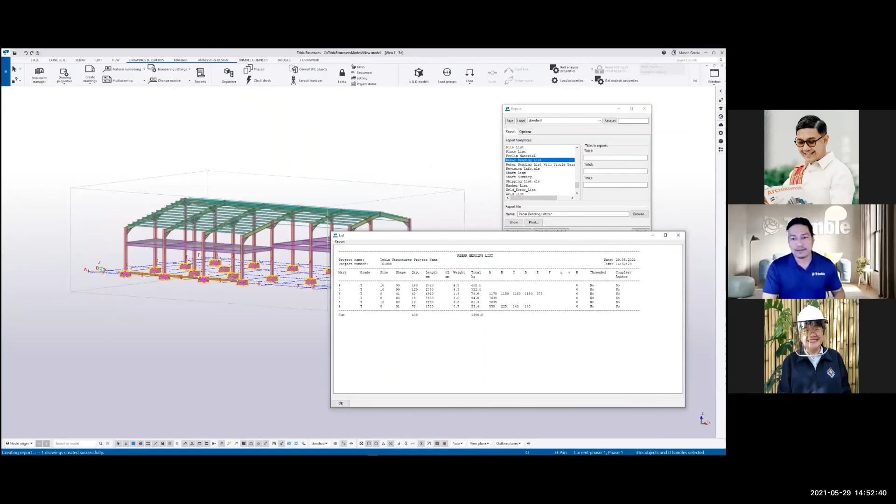These are out of the box, or you can use our organizer, which is also part of the thing inside Tekla Structures, wherein when you highlight them, it will automatically populate for you. Okay, so I think I'll move quite fast now, so I'll minimize this and go to the quick.

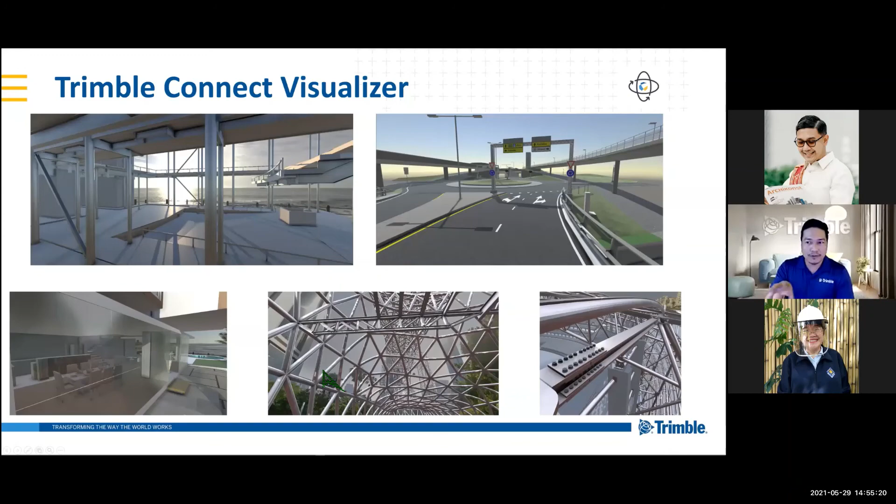Yeah, you see this? This is a 3D engine built into Tekla Structures, wherein whatever you have modeled, it will convert into this kind of visualizer. So if I switch my model here, can you see my model? If I select 'visualize all', can you see my model? If I click this using the model, it will create an image.

You see the quality of this — if they are steel, then they are rendered as steel. If they are concrete, then they are shown as concrete as well. So you can also view the reinforcement, right?

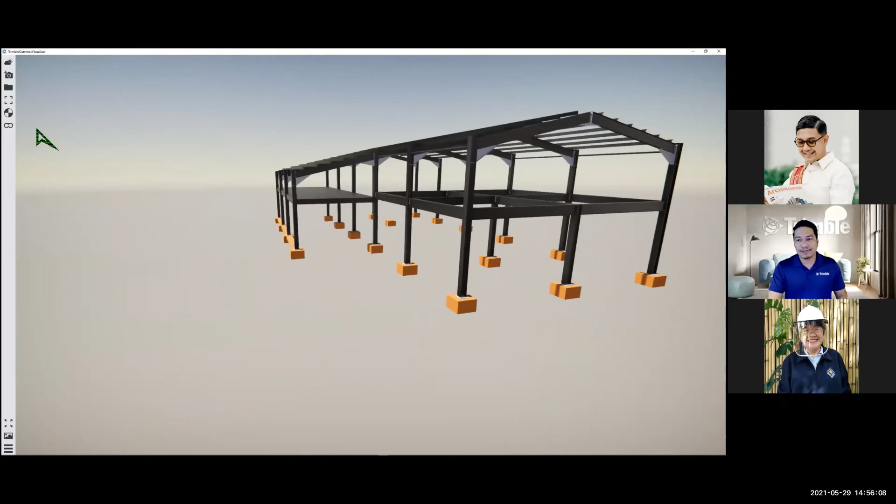So you can also create a quite nice... hold on. Okay, and here, hold on — you can click the surface, you can drag this, you can change the sunset. This is included in the software as well. Here you can adjust the appearance if you want. So you can even create an image out of this, let's say... maybe no need. So these are the Trimble Connect Visualizer features that you can utilize inside Tekla Structures.

Okay, let me put it back. So the Trimble Connect HoloLens — if you're interested, we can check you out with our reseller in the Philippines, VTS, to have a demonstration or a quick session on how to use this Microsoft HoloLens at your site.

Quickly, this one — the property set library. What it does is when you bring them inside Trimble Connect, of course you cannot alter them to change into your own information. Here, this property set can be created outside of BIM, and then you can add information like submitted, in assembly, galvanized. You can add this information inside your properties.

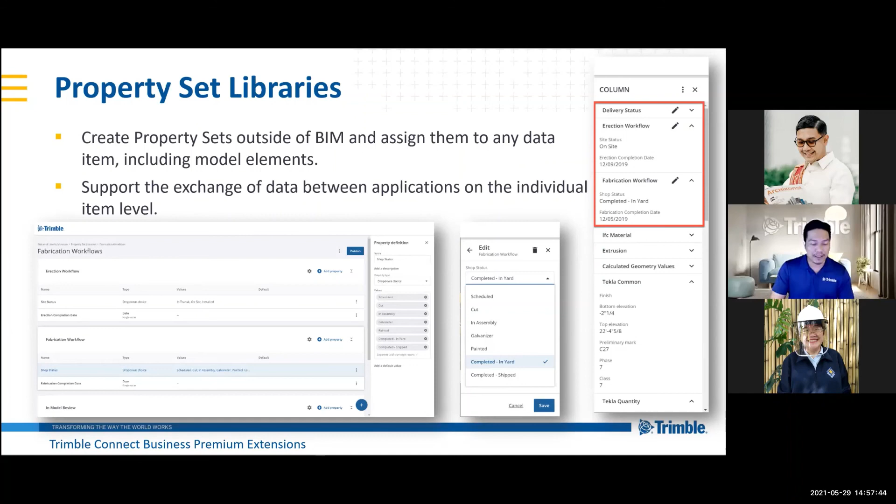And here, the content browser as well. When you upload your model, you can view all the properties necessary. So you can sort, group the model, interact with the model, colorize it, select the model. Of course, you can also export to CSV, Excel, all of this, so that you can populate and extract the information. Again, the model carries high information — it's a bit high LOD — and the more information you have there, it's just a matter of extracting it using this functionality.

Unfortunately I don't have time to show you how it works live, but this is what it looked like. You can simulate status sharing between the office and the site team. Since the site team doesn't have Tekla Structures to view, they can use their mobile phone and the cloud to color-code whether an item is submitted or completed, so the office can instantly see the status.

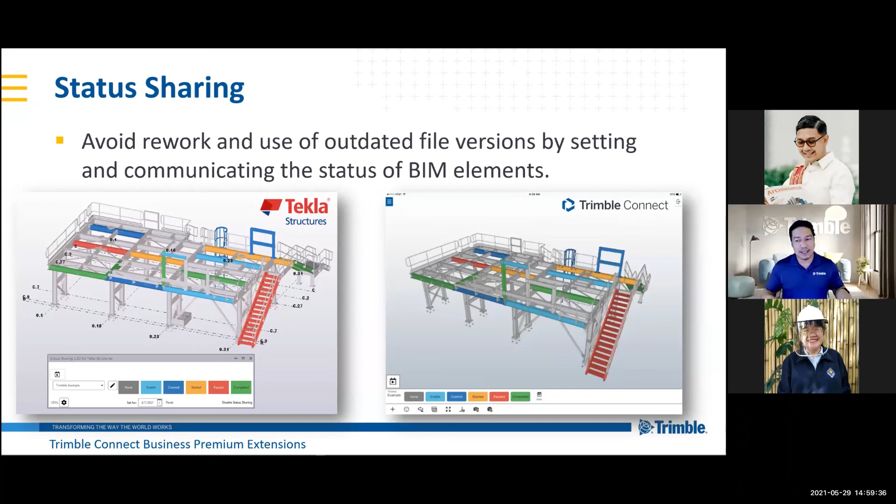This is what we currently do here in Singapore. Because we are into IDD, we have this so-called status tracking dashboard, where you can view - especially if you are a precast contractor - what is the status or progress of your item using Trimble Connect as well.

Before I end this topic, allow me to show you one video, and then after that - okay, let me show you.

This video shows how we did things at the Sports Hub. Hold on, give me a second.

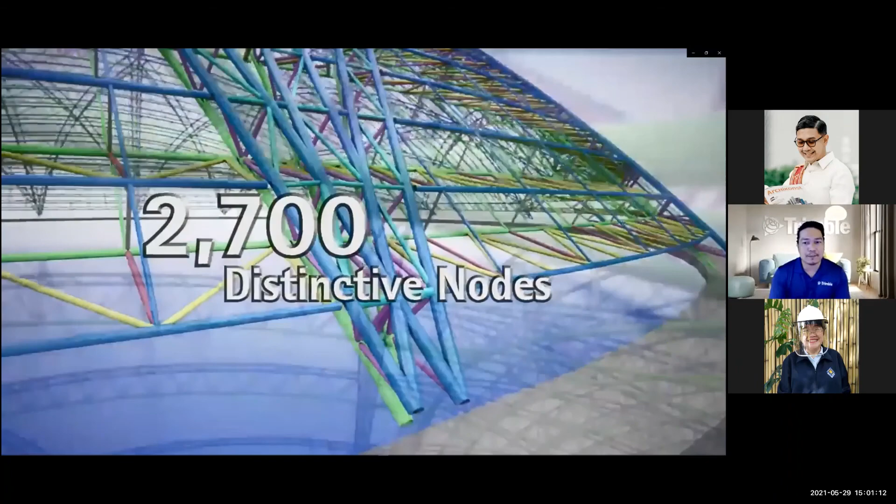From the start, our main business has been steel construction. Starting from small structures, we have expanded our business to more complicated and bigger projects. Today, more than 95% of the projects we undertake are modeled and documented using Tekla Structures. The Sports Hub, a stadium which at first glance seems simple six years ago, but in real life a very complex structure. Around 60 different connection types are employed to join more than 25,000 unique elements, with 2,700 distinctive nodes on each end.

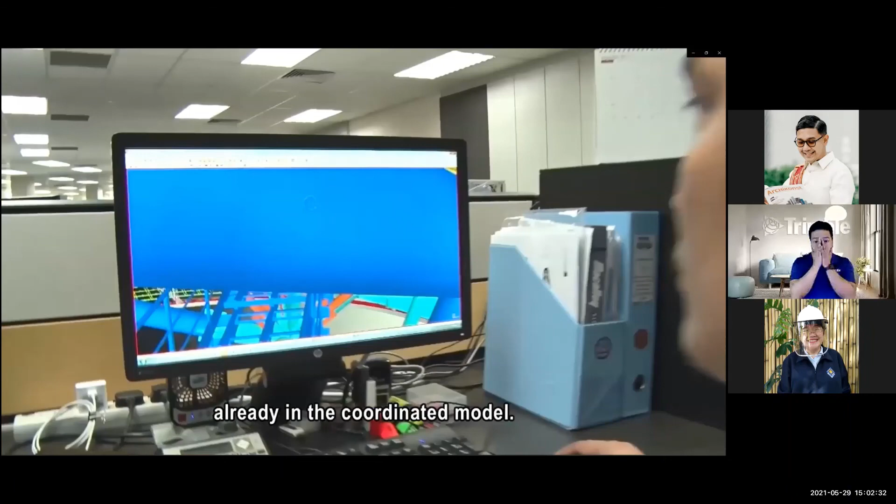Before construction happens, the BIM model carries live information which enables project parties to identify and solve issues already in the coordinated model. Yongnam has collaborated extensively with the engineering team, and through this collaboration we have been able to model the entire structure as well as include the connection and joint details.

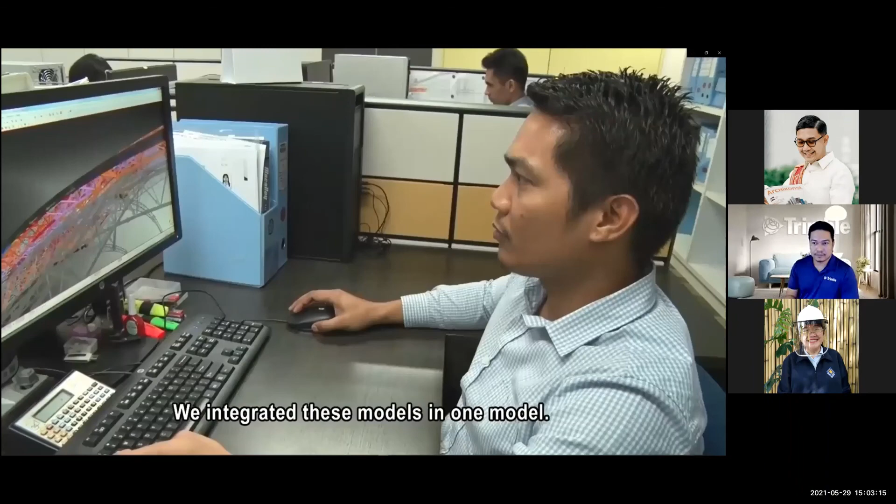The major point of the roof structure of Sports Hub is the coordination of structural parts and mechanical and M&E service parts. We prepared the model of the structural parts, the mechanical subcontractor prepared their own model, and we integrated this into one model.

One of the key benefits of Tekla Structures is its ability for both Yongnam as a contractor and the engineering consultants to visualize the problem. This feature has resulted in a very fast turnaround time for solutions, which in turn has direct time-saving advantages for our modeling and fabrication drawing generation.

Aside from technical things, it also plays an important role in enhancing the productivity of our operation. It helped us greatly in reducing time for profile cutting. Thousands of bracing pipes enable us to set out the geometry in the right approach in the workshop accurately, as well as loading it safely onto transportation while getting the COG directly in the BIM model.

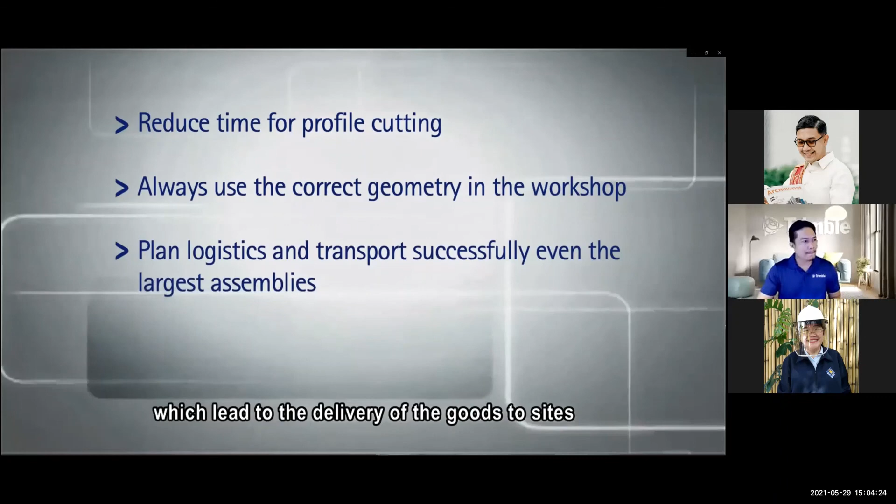It also enables us to predetermine constraints on the public road and how to transport these massive trusses, which leads to delivery of the goods to site accurately and in a timely manner. It also allows us to foresee any erection difficulties as well as possible clashes during erection, while analyzing a good solution to prevent them from happening.

Yongnam needs to take more advantage of the other features that Tekla Structures has, especially in the field of CIM - computer integrated manufacturing, productivity improvement, and production management. We feel that we can use Tekla as an integral production tool above and beyond the requirements of BIM. The power and flexibility of Tekla Structures, not just in 3D processing but constructible BIM-based modeling, is so powerful you can even create design into reality. We have been using BIM for a long time, so now it's very difficult to imagine the system without BIM or Tekla.

So those are my previous bosses. Yeah, I think that's it. Thank you, everyone. I'll pass it to... thank you.